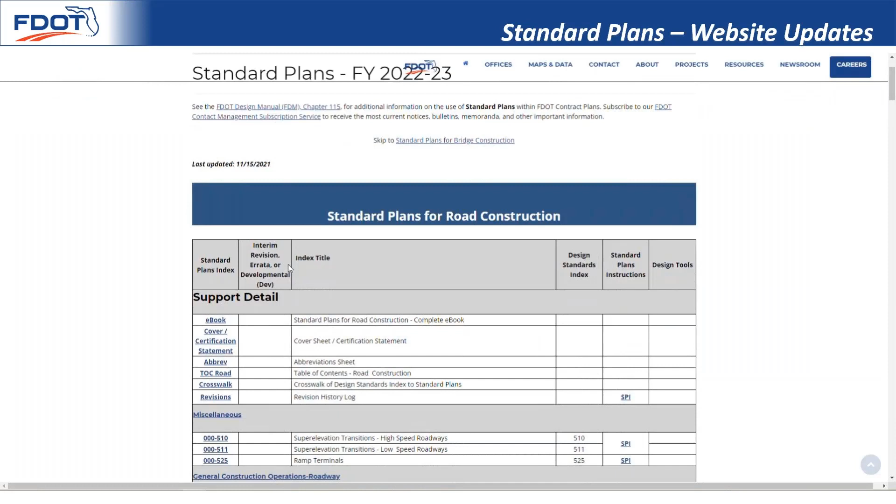Here are the indexes. We have the complete ebook available here. The revision log is always the best place to see a summary of what changed in the indexes on a given cycle. You can see we have the sheet and summary of what changed on each sheet. You can see we had quite a few changes this year, and this is just really a brief summary of what changed on each sheet. You can also find all the past editions of the standard plans here.

The review and response section was the biggest change to our website. We still have the origination form and a link to the industry review, just like last year, and the archive is basically the same as last year. But we now have the track the status of revision page that has all the changes that we've made throughout the year to the standard plans for the current cycle. You can see that there's a link to the original package that was sent out for review.

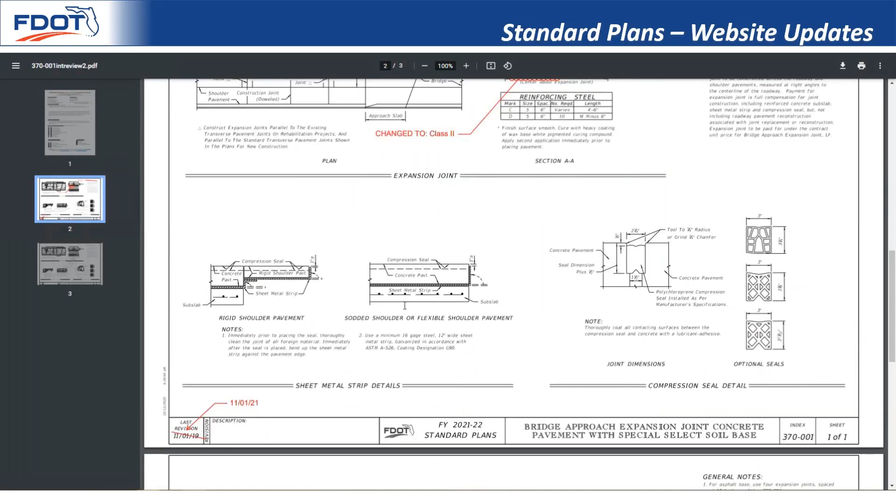I'm gonna select an example here. You can see there's the origination form with the red lines and the draft. We also have the response packages for any indexes we received comments on from our industry review or internal review process. You can see we didn't receive a comment on all of them. Here's an example of what our response package looks like. It's got the comments and the responses.

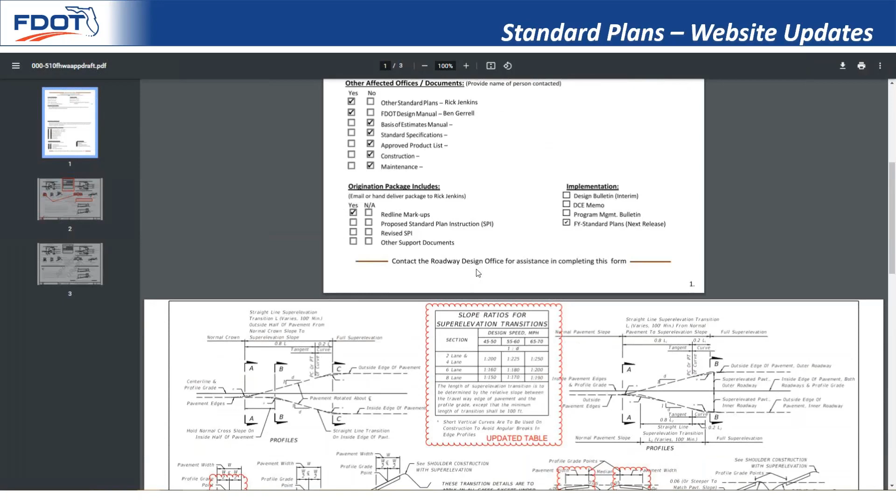And once FHWA has approved the revisions, we post a draft of the approved package with the origination form and red lines, like shown here. Here's the origination form, and then you'll see that we have the red lines. And this draft should be the same as what we released for implementation.

Okay, now that we're done with the overview of the website, let's go over the updates to the 2022-2023 standard plan indexes. We had a lot of revisions this year, but some of them were just administrative changes, so it shouldn't take that long to go through them all.

The first revision I want to go over is more of a global change that was requested by our State Materials Office. Per the request of industry, Class 1 concrete was removed from the specifications and therefore had to be removed from the standard plans. This was done to 18 total indexes. I'm not going to go over each and every location within indexes where Class 1 concrete had to be replaced, but here is a complete list of the affected indexes.

Like I mentioned, I'm not going to cover all the locations, but index 370001 was one of the indexes where Class 1 concrete had to be replaced with Class 2. So you can see we just found where the Class 1 was listed and subbed it out for Class 2.

This index also had a revision to General Note 1. The existing note provided direction to use 4 expansion joints per index 350001, which provides the required joint dimensions. However, it was not clear what the required spacing of these 4 expansion joints should be.

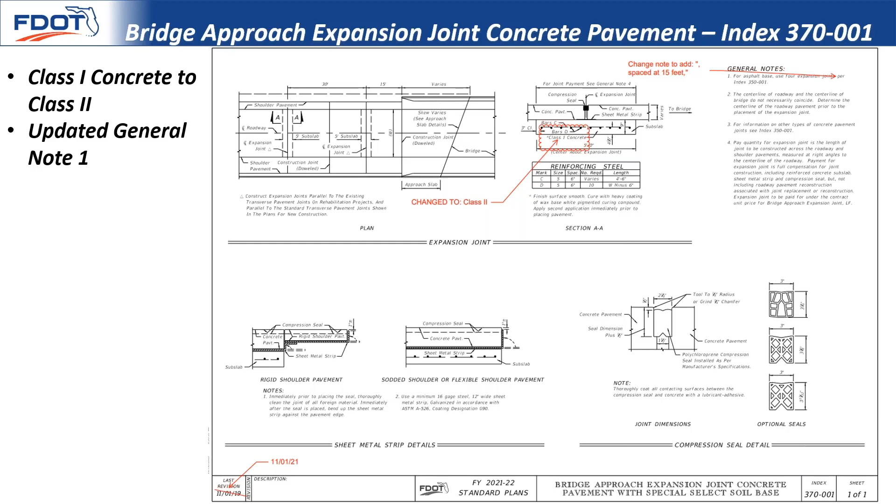Spacing between these joints with asphalt-based concrete pavement should be 15 feet. General Note 1 was revised to indicate the required spacing of the joints. Here's the updated index with the updated General Note 1 and also the Class 1 concrete reference revised.

The next pair of indexes I want to go over are the Superelevation Transition indexes 000510 and 000511. These revisions to the Superelevation Transition indexes were proposed to make the standard plans more consistent with the FDOT Design Manual, FDM, Table 210.9.3. You're going to hear me say this repeatedly today. A lot of the changes we made were to make the standard plans, the FDM, the traffic manual consistent, and that's what leads to a lot of our updates.

Oh, sorry. Here we added the arrows to section A to be consistent with the arrows included in the standard plans index 000511. We updated the slope ratios table to match the FDM. And we added a 2-lane option to the pavement with median details to be consistent with FDM. Here is the updated sheet 1 with the revisions we made.

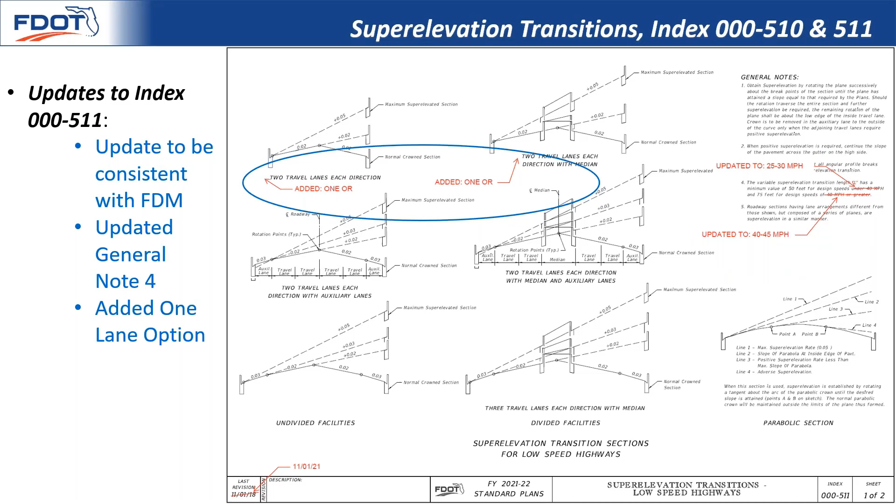Okay, here's index 000511, Superelevation Transitions for low speed highways. Similar to 510, these revisions were made to make the standard plans more consistent with the FDM. Here on sheet 1, we updated note 4 to match the values in the FDM. We added a 1-lane option to the facilities to be consistent with the FDM. And here is updated sheet 1.

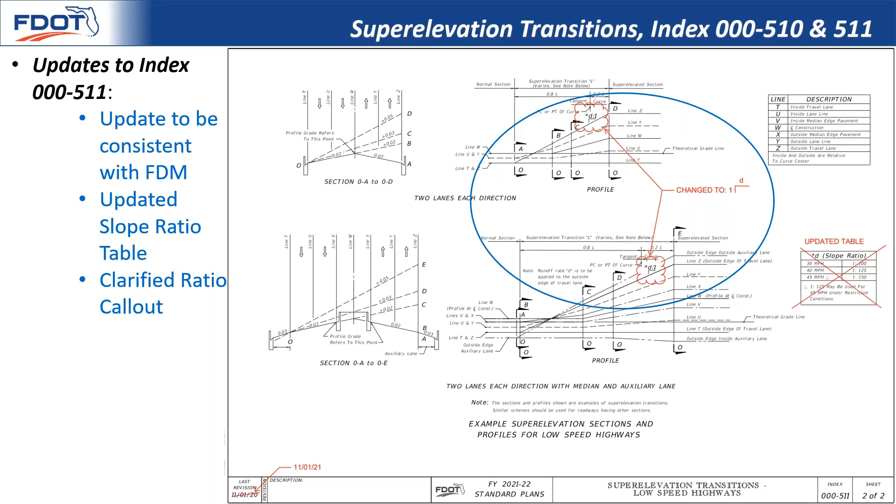Here on sheet 2, you can see we updated the slope ratio table. And we changed the ratio call out in the profile views for clarity. And here is the updated sheet 2.

The next index I want to cover is index 350001, concrete pavement joints. These changes came from our state pavement engineer, Mary Jane Hayden. We made a few revisions for clarity, including updating note 3 to delete the standard load transfer because the correct tie bars are not used for load transfer. We changed the spacing of number 5 bars from 30 inch to 36 inch. This was done to match the spacing of the slabs, which are typically 15 feet long.

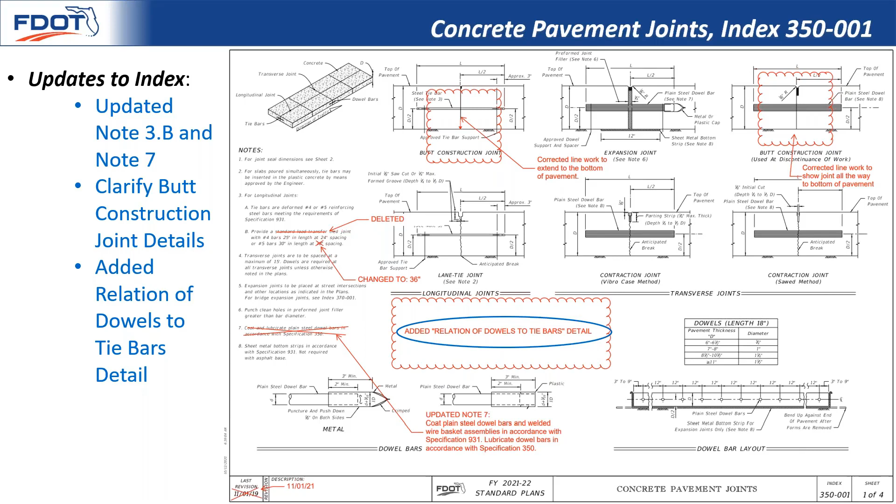We corrected the butt construction joint details to show the joints extending from the top of the slab all the way to the bottom of the slab. But the main update to this page was adding the relation of dowels to tie bars detail. This detail should depict the minimum distance that tie bars should be placed from transverse joints. This was to eliminate the potential of the tie bars overlapping with dowel bars near slab corners. There should be at least 9 inches of clearance between the end of the dowel bars and the tie bars, so place tie bars at least 18 inches from the transverse joints. Here's the updated sheet 1 with all the revisions we just went over.

Okay, here's the drainage index, 425061, the closed flume inlet. I've received a number of calls over this over the last couple of years. The flume length must be called in the plans. The call out previously said varies, but didn't give good direction on how this was to be called in the plans. This information has been added to the SPI to make it clear how the designer should specify this in the plans.

We added the flume length to the generic varies call out to make it clear what we actually wanted to be specified. Also, the varies callouts were deleted from the section reference and note because the sections as shown are not variable. Here's the updated sheet 2. You can see we updated the callout here.

Okay, here's the next drainage index that I want to talk about. We moved the joining mainline pipe to stub pipe details and notes 3 and 4 to the standard plans instructions. And we deleted notes 5 and 7 because they were left over from the old pipe riser detail that was removed. These changes were brought about because the drainage manual requires pipe junctions to have topside access via a structure. Deviation from using a structure to join pipes requires district drainage engineer approval.

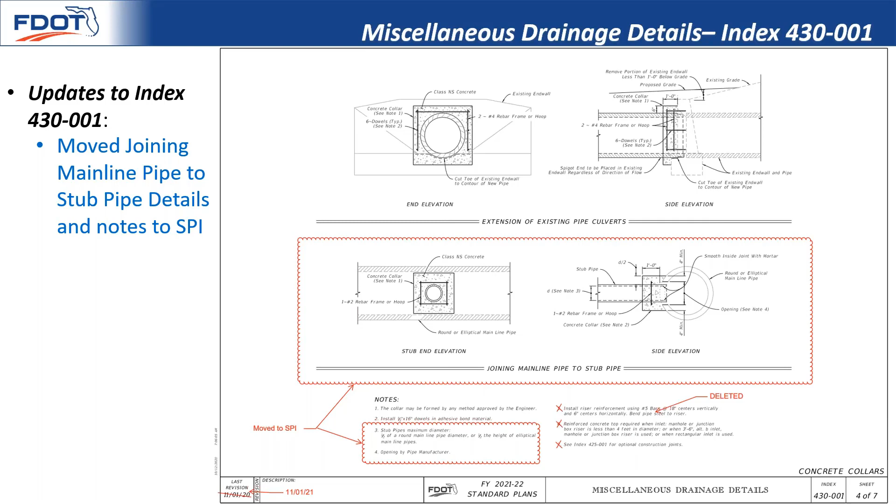While there are applications where the stub mainline pipe may be needed, the detail is proposed to be removed from the index to emphasize that it's a non-standard item. Here's the SPI with the information added. You can see that we added the notes and the details. And here's the updated sheet 4 with the detail removed and the notes deleted.

Okay, like we've done in the past few years, we did go through and clean up and redevelop a few indexes this cycle. The 3 indexes that I redeveloped were Index 520001, Curb and Gutter, 520005, Concrete Shoulder Gutter Spillway, and 520010, the Median Opening Flume. I'm not going to go over each index since it was the same concept with all 3, but I will go over the changes to the 520001 so you can see the concept.

We moved all general notes to sheet 1 and created isometric views to stay consistent with the other indexes. And we did this to all 3 indexes. You can see we grabbed the general note from here and moved it to sheet 1. We also went through the callouts to determine if some were better represented as notes. We did this throughout any index I worked on. We did this to determine if notes should become callouts or callouts should become notes to make things more clear.

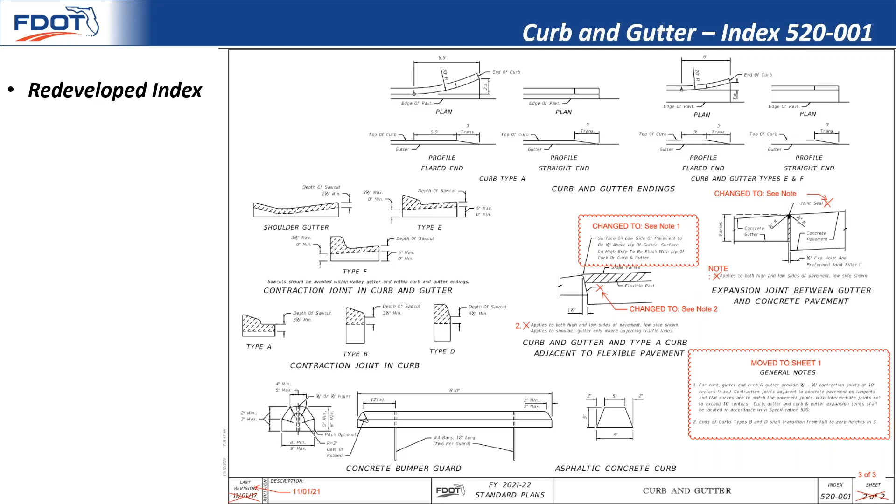We added the new sheet 1 with the isometric views of all the pieces. It looks a lot cleaner with the general notes and the table of contents here on sheet 1. Sheet 2, formerly sheet 1, with the same information as before, just redrawn and cleaned up. And here's the new sheet 3, formerly sheet 2, pretty much the same information with general notes removed and redrawn and cleaned up.

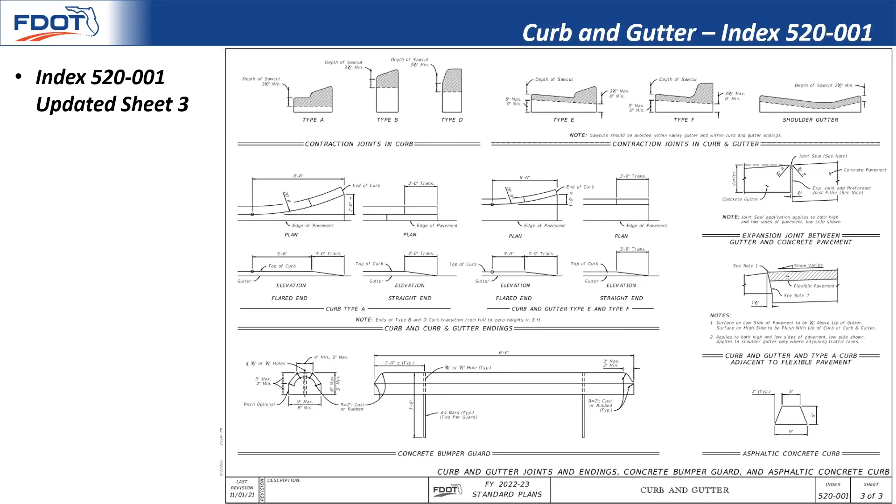We had several updates to the Detectable Warnings and Sidewalk Curb Ramps Index 522002. There had been some confusion on the minimum curb ramp width and how it should align. So we added a new note 2C to help clarify that the minimum width is just a minimum and that the width should match the adjoining sidewalk or shared use path.

So the CR-D curb ramp is essentially half of the CR-C curb ramp. The CR-C curb ramp currently shows the 4-foot minimum dimension at the back of sidewalk to provide a large enough level landing footprint for a wheelchair. The CR-D curb ramp, as it's currently shown in the index, does not provide the best configuration for users of mobility devices. So we updated the CR-D ramp to have a 4-foot minimum dimension at the back of sidewalk for the level landing at the bottom of the curb ramp. This provides the necessary plan area footprint for level landing to allow for wheelchair movement and change of direction. Ideally, the resulting curb return would remain parallel to and aligned with the direction of the crossing.

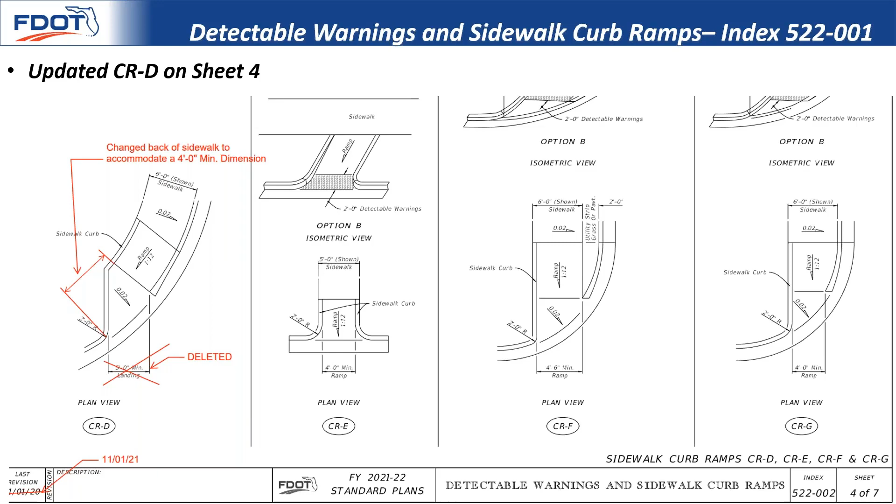So here's the updated sheet 1 with the note added. And here's the updated sheet 4 with the CR-D curb ramp updated. You can see the 4-foot minimum and how it's aligned with the double crosswalk.

Okay, here's some changes that come from our traffic engineering office. First, we revised General Note 2 for clarity here on Index 630001. It now reads, when sidewalk is damaged by conduit installation, replace the entire sidewalk slab. And we wanted to make it clear that the slab had to be replaced in whole if damaged.

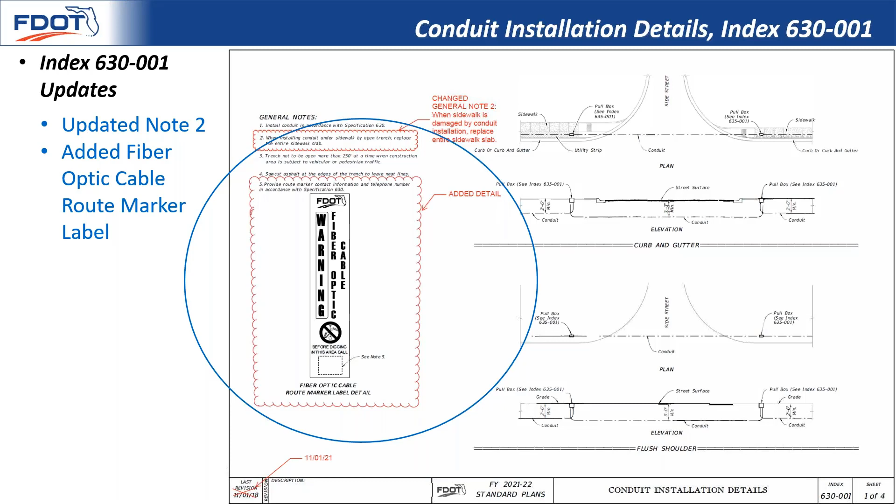The main update to this index was adding the fiber optic cable route marker label detail. There's a repetition of this detail in each plan set with new fiber installation. A standard index detail may eliminate the inclusion of this detail drawing in each project plan set. So here's the updated index. You can see how we added this detail and updated the notes.

So next I want to go over the CCTV pole indexes. First, we will look at the concrete CCTV pole index. The handhole on the pole should be located downstream of the traffic, so all details and notes were updated to show this. These updates were made to both of the CCTV pole indexes, the concrete and steel, 641-020 and 649-020, including adding some new notes on the pole installation.

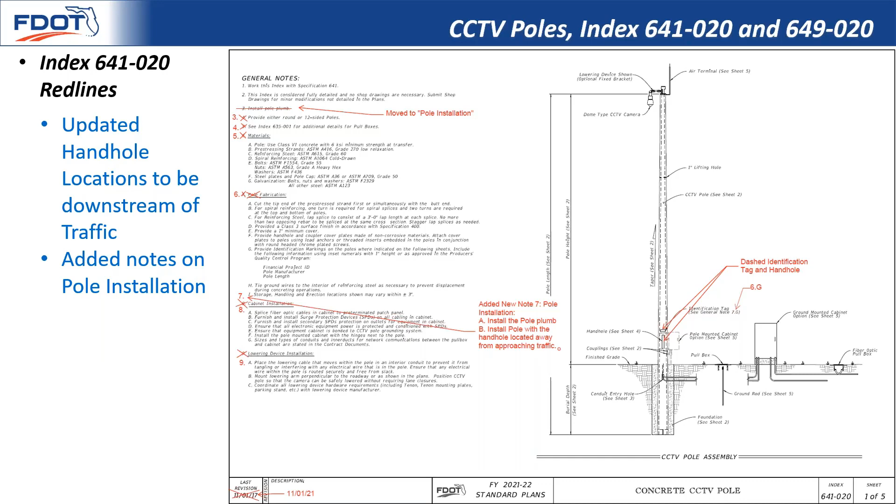Updating these indexes fixes a couple of issues. First off, the handhole location now matches the APL information we provide. Also, the location of the coupling shown on the CCTV pole assembly on sheets 1 and 2 did not match the location of the couplings shown on the pole elevation and handhole detail on sheets 3 and 4. I'm not going to go over each and every sheet in this index, as all these revisions were related to the handhole locations.

But here is the updated sheet 1, and you can see here in the next view, I'll zoom in. You can see that we actually changed the way that the handhole was represented on the detail, and that just clarifies the location.

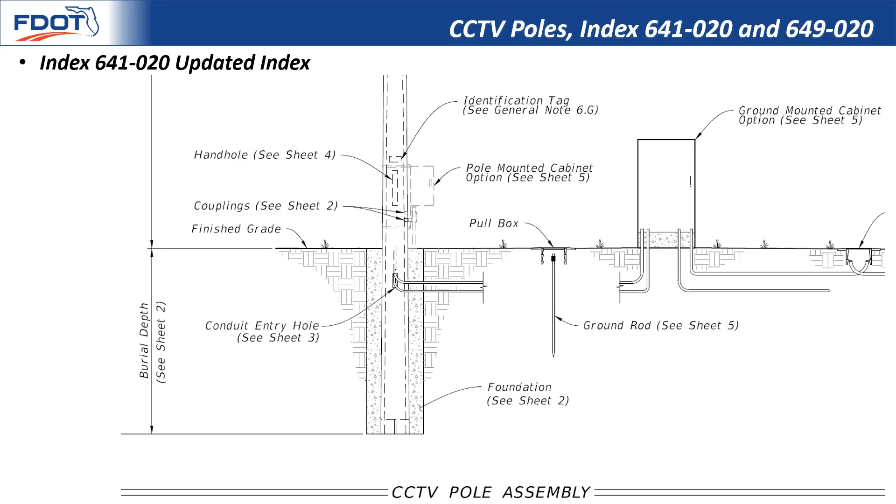We made very similar revisions to 649-020, the steel CCTV poles. We updated the locations and added the handhole locations and added the notes to match the notes that are in the concrete CCTV pole index 641-020 that we just went over. Once again, I'm not going to go over each sheet, but here's the updated sheet 1 with the new notes and the updated handhole details.

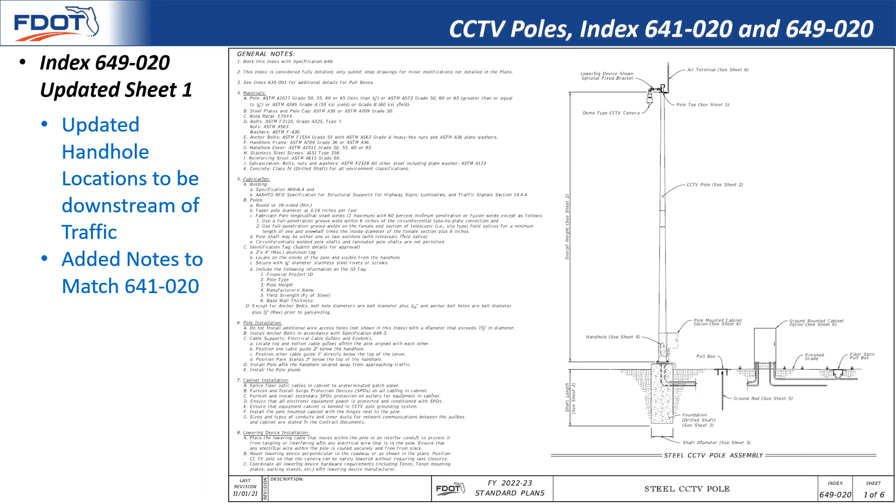So the foundations within Standard Plans Index 646.001, 654.001, 695.001, and 700.120 are being updated to be more consistent between the different applications. An analysis was completed by our Structures Design Office to determine if the foundations could be revised to provide a more consistent design between the various applications. The aluminum post or pole references were also updated throughout the indexes.

So let's start with index 646.001. We changed note 4 to remove concrete type since it's specified in specification 646. We added note 5 stating, as an alternative to the direct buried post-mounted pedestrian detector assembly shown below, the post may be installed on a transformer base included on the APL, use a transformer base included on the APL as an alternative to a post-mounted assembly. I'm going to show you that actual APL item in a second.

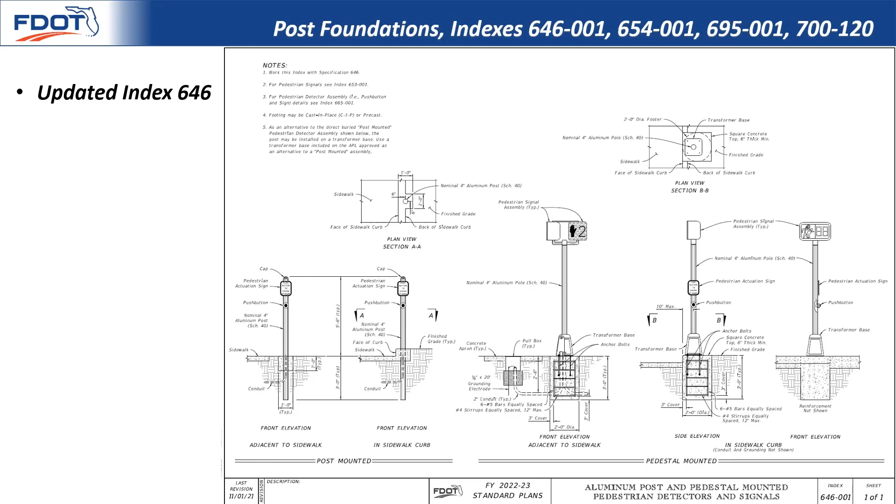Okay, now let's look at 654.001. We made the same type of revisions as 646. We reorganized to show the beacon assembly adjacent to the sidewalk. We deleted detail B and updated note 1 to reference index 700-120 for pull box, conduit, wiring, and grounding installation requirements. We also updated note 7.

We updated the pole callouts and updated the way the anchor bolts were shown in the foundations and updated the callouts to point to both front view and side view details for clarity. I'll show you what it looks like in a second. So here's the updated sheet 1. You can see how we have the callouts now in between the two, and we did this throughout these indexes to make it clear that it's just a different view you're looking at, the front view and the side view.

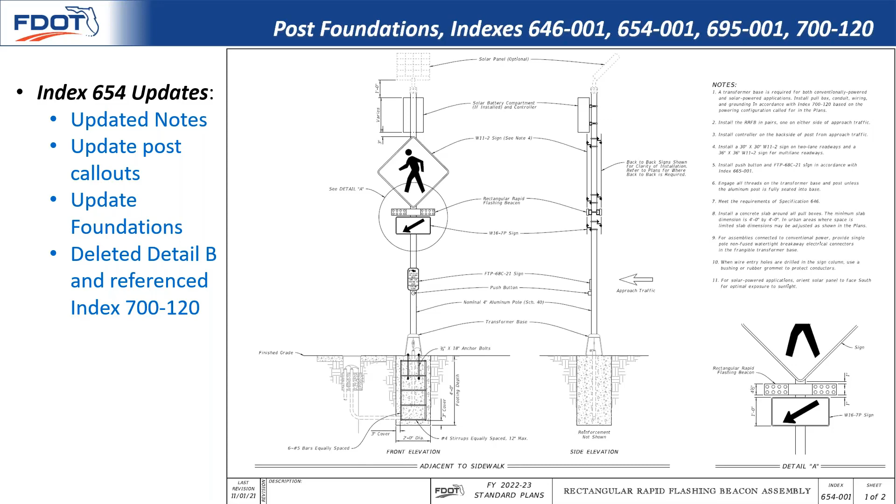Sheet 2 is a new sheet showing the beacon assembly in the sidewalk curb. There. This addition of the inside curb option allows the reach range to work like it does on 646.001.

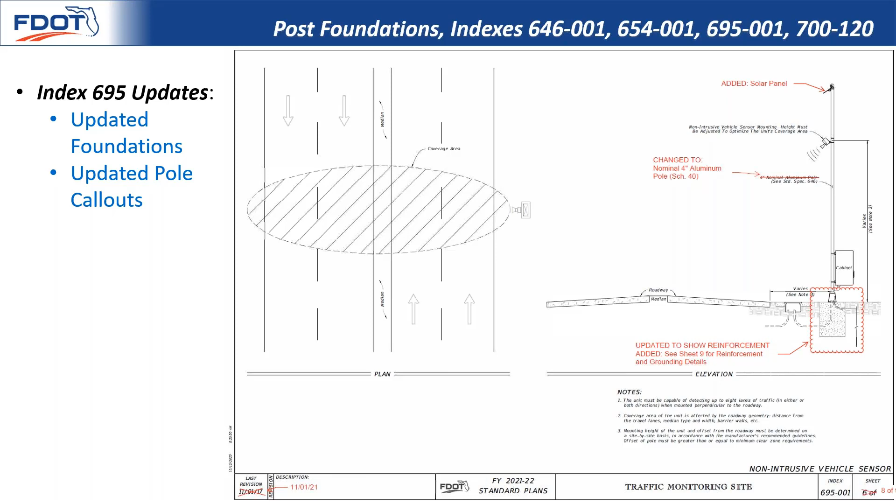We also made similar updates to the foundation details and callouts in index 695.001, traffic monitoring sites. Here's the red lines for the new sheet 8. See, it's very similar red lines and proposed changes. Here's the updated sheet 8 with the foundations and callouts revised.

Here's the new sheet 9. We made the same type of foundation updates to make the indexes consistent. We updated the pole callouts. We revised note 2 to reference specification 646, and we did this on all the indexes. Per the request of our structures office, we did make some edits to note 6 regarding the concrete base dimensions. And here's the new updated sheet 9 with the foundation updates, the pole callout updates, and the revised notes.

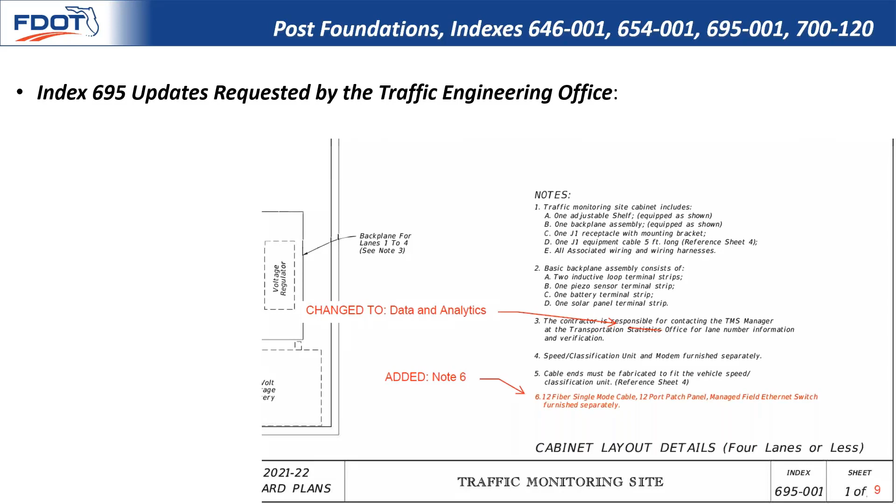In addition to the foundation updates, our traffic engineering office made some other changes to index 695. On sheets 1, 2, 3, and 4, we updated the name of the office from Transportation Statistics to Transportation Data and Analytics. I'm not going to show you all of these, but here's sheet 1 showing this update.

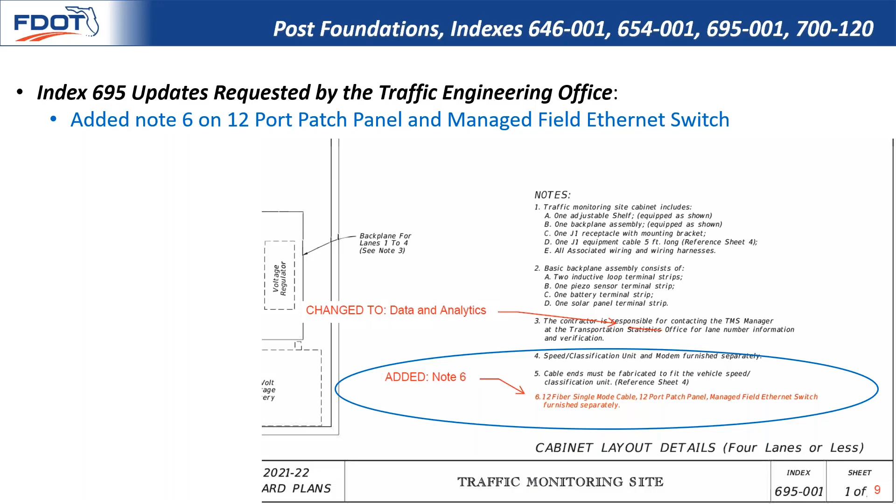They added note 6, 12-port patch panel and managed field Ethernet switch. This was also done to multiple sheets, but I wanted to show you what it looked like here. Also added callouts here to reference the new note 6. Here's the new callouts. And here's the updated sheet 1 with the callouts and then the notes updated.

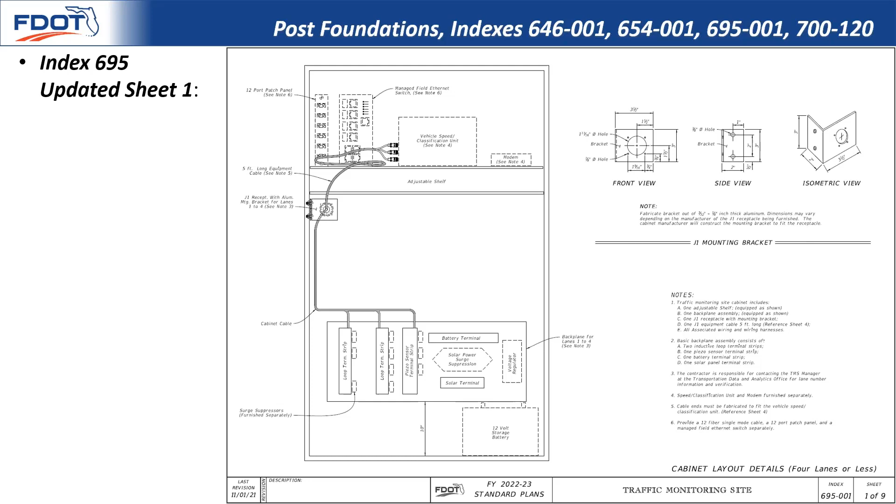So here on sheet 4, we updated the color scheme to match the color scheme that's used by the vendors. So here's the updated sheet 4 with the color scheme updated.

So the interstate traffic monitoring sites are being connected to the FDOT statewide fiber optic network. The weigh-in motion sensors are being installed in 2 different ASTM configurations, Type 1 and Type 3. The weight sensor language was added to specs 695 and 995 according to all volume classification and weigh-in motion traffic monitoring stations. All of these revisions are necessary based on current updates to specification language and industry standards.

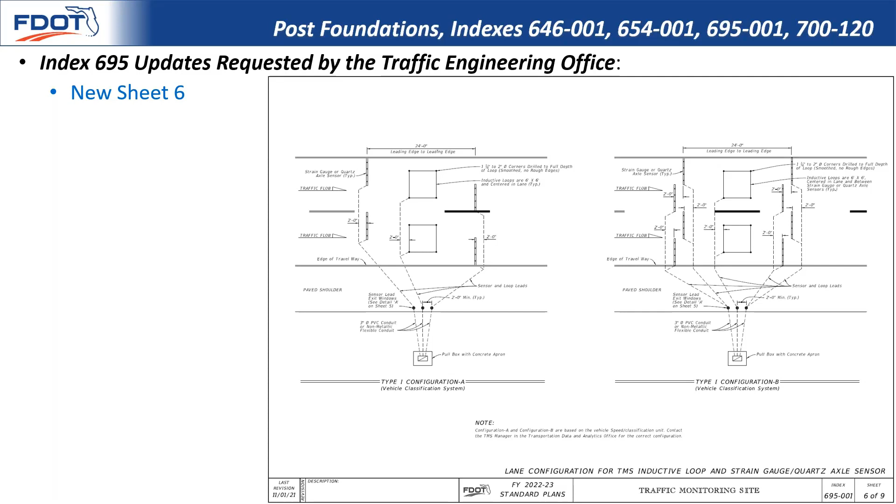So here's a new sheet 6 describing the telemetered traffic monitoring sites, TTMS, for Type 1 lane configurations, A and B. They also added a note to contact the Transportation Data and Analytics Office for the correct layout based on vehicle classification unit. And here's the new sheet 7 describing the TTMS for Type 3 lane configuration.

Okay, now let's look at 700-120. We made similar updates to the foundation and pole details and the notes here in 700-120 as we did in the 646, 654, and 695. We revised the callouts and foundation to make it as consistent between the 4 indexes as possible. We did this throughout the index.

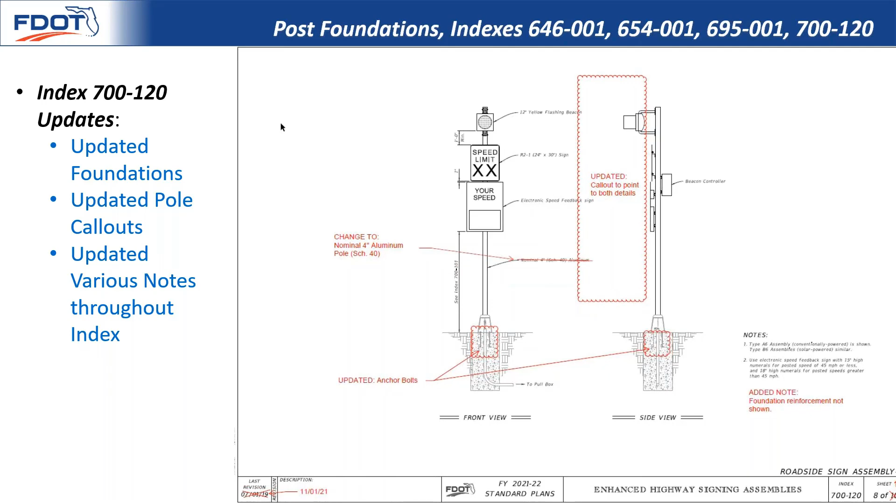Here you can see a quick run through of the red line changes, pretty much the same markups on each sheet on the foundation updates, the added note, and the pole callouts. So I'm just going to quickly run through those. And here's the updated index. You can see the revised callouts on the pole and the foundation, and the note on each sheet is very consistent with what the changes were. So I'll just quickly scroll through all of these changes.

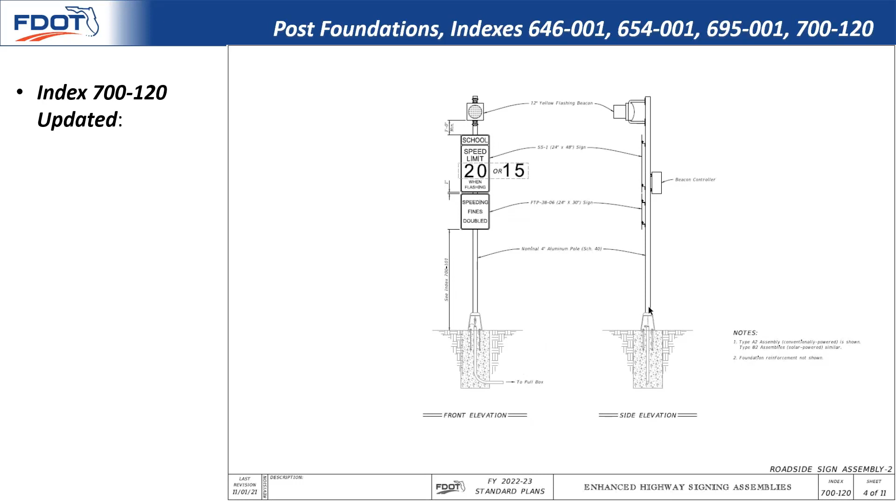The next index I want to go over is index 700-101, and specifically an update to the single column sign case 8, offset from a median, curb, or island nose. This request actually came from our District 4 office. They had been trying to implement a standardized 6-foot offset in this application as a District 4 practice, so we're adding it to the standard plans index to make it a statewide policy.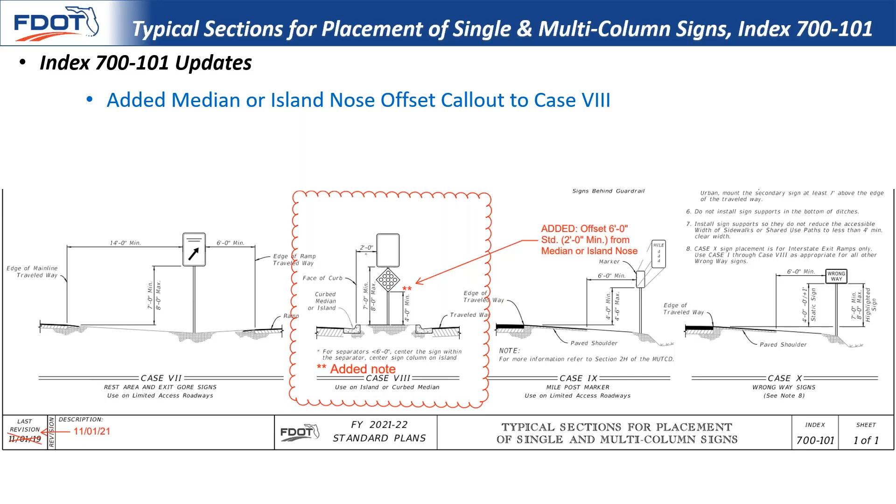Here you can see case 8 detail has been updated with a double asterisk and note to require that the offset be 6-foot standard, 2-foot minimum from the median or island nose.

Okay, next I'm going to go over some of our updates to the special sign details index 700-102. On sheet 5, we updated the speeding fines doubled sign, FTP 38-06, the font, the dimensions, and the numbering. This was updated to follow the current MUTCD standards and correct the FTP graphic.

I did want to point out that anytime we make a revision to a sign or we add a new sign, we have to update the numbers because the last 2 digits are the year that it was released. So for all the updates we made this time, we'll have 22 as the end of the sign numbers. So here is the updated speeding fine sign. And you can see the dimensions updated, including the new number.

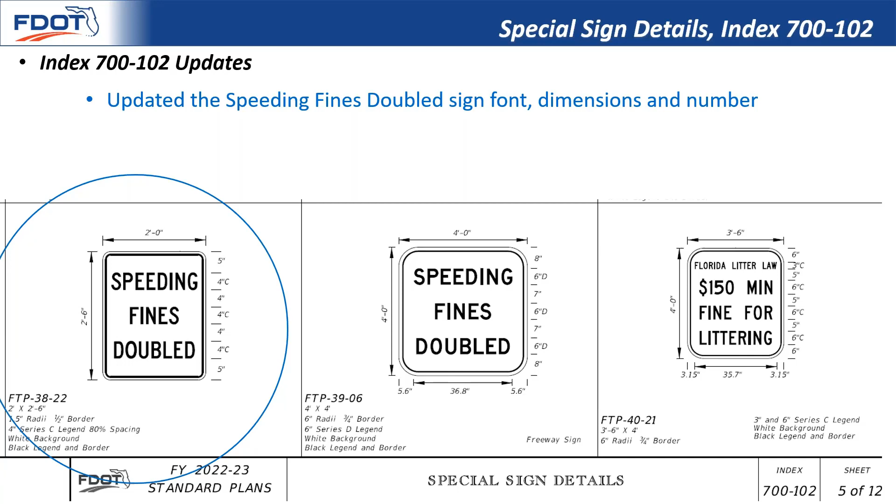Okay, here on sheet 10, we added FTP 90-22 and FTP 91-22, the 2 new school bus load or unload signs. We also updated MOT 106, MOT 406, MOT 506, MOT 606, MOT 706, MOT 806, and MOT 906, all for font size, dimensions, and numbering. We then had to shift to accommodate the new signs. So MOT 806 and MOT 906 are now on sheet 11.

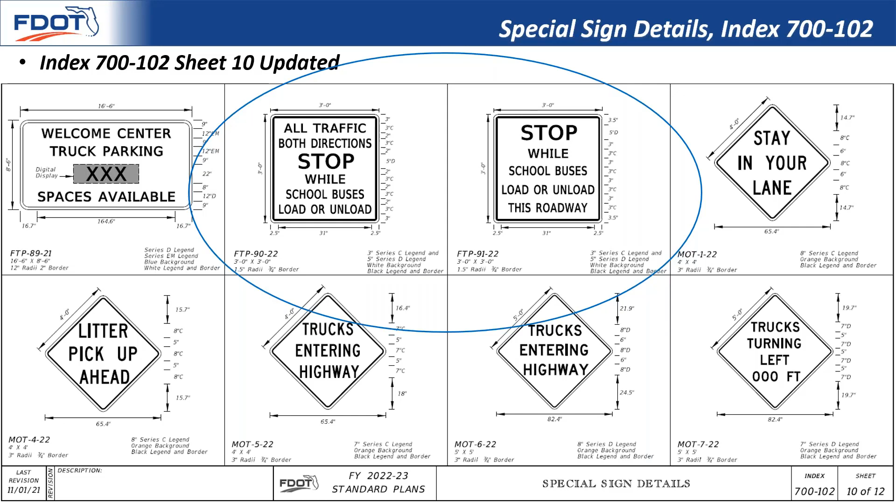We did delete one index from the standard plans altogether. Index 700-109 is no longer needed since this information was moved to FDM Chapter 230 with bulletin 21-07 on wrong way driving. Please see bulletin 21-07 for more information on this.

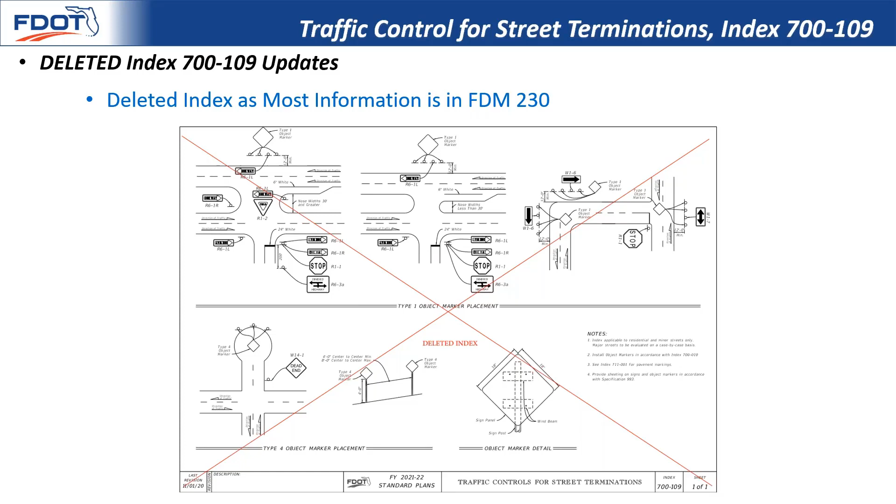The next index I want to cover is index 706-001. For clarity, we updated index 706-001 in regards to where yellow paint should be used and where to place RPMs. We changed all references to yellow reflective paint to durable paint yellow. We also added 2 new notes.

We wanted to make it clear that bituminous is not allowed for the installation of RPMs on concrete. So we added note 3, use epoxy adhesive to install RPMs to concrete median nose curbs. RPMs should not be placed on painted surfaces, so we added note 4, install RPMs on clean, unpainted concrete surface. Do not paint curb surface where RPMs will be placed.

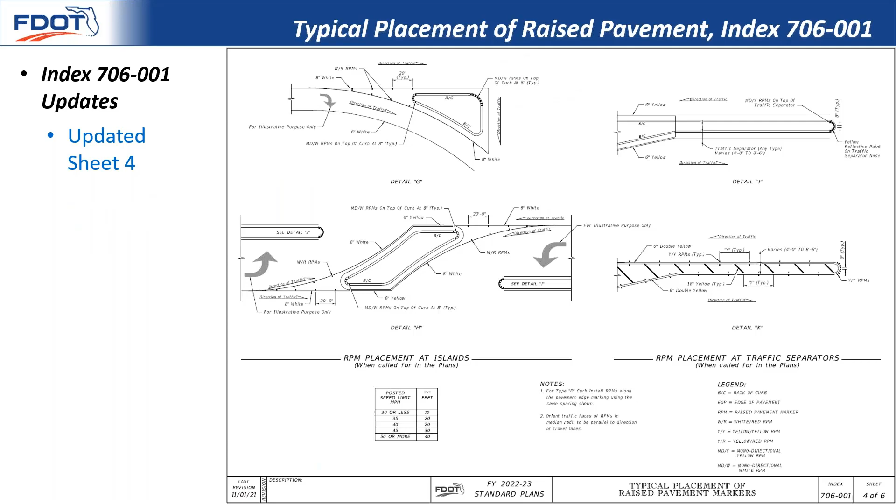We also deleted note 1 for pavement messages, changed note 5, new note 4, to all pavement messages must be white except route shields. Oh shoot, sorry, didn't mean to change it. So where are we on note 4 here? Yes, so note 4 now reads, all pavement messages must be white except for route shields and in-pavement warning markings, so the new pavement warning markings.

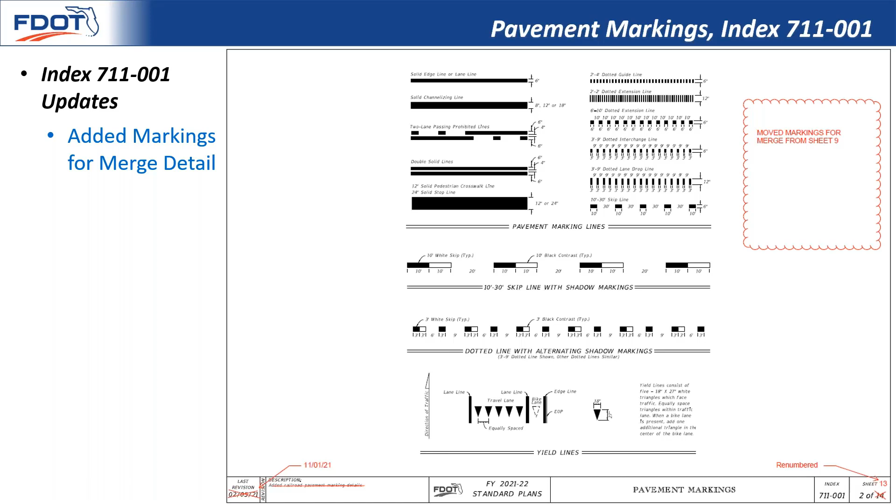So here on sheet 2, we moved the markings for merge detail from the deleted sheet 9. I'll show you where it was previously located in a second. Here's the updated sheet 2. We deleted the right turn lane drop island details and detail C from the index. This information was moved to the FDM and combined with the signing details shown in chapter 230.

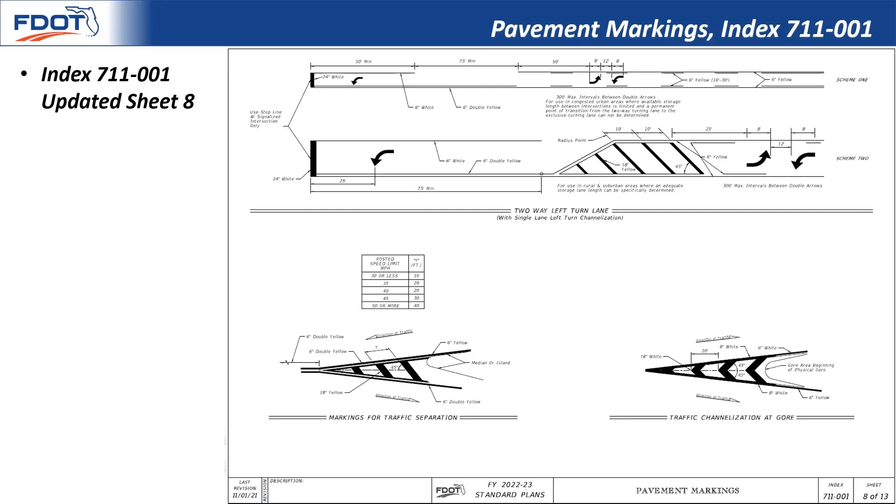Okay, here's sheet 9. Like I said, it was deleted from the index and all the information was either moved to another sheet or somewhere in the FDM. The schemes for transition details and detail D were deleted from the index and moved to the FDM. They were combined with the signing details shown in Exhibit 230-05. We changed detail E to markings for merge and deleted the note, and then moved the details to sheet 2 like I showed you earlier. And we moved the markings for traffic separation to sheet 8.

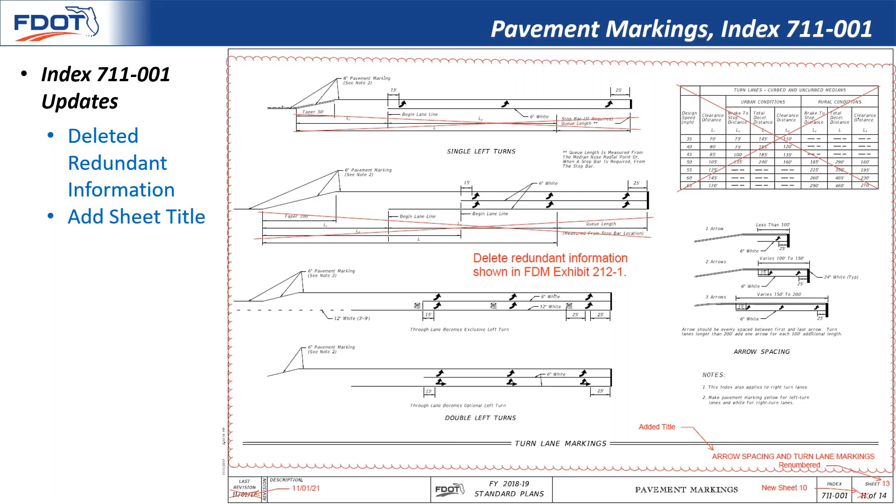Okay, for the turn lane marking sheet, we reverted back to the 2018-2019 index and deleted the redundant information that is already shown in FDM Exhibit 212-1. We also added the sheet title here. We try to do this on every sheet throughout the standard plans to stay consistent. Okay, here is the new sheet 10 that replaces sheet 11 with all the updates.

On sheet 12, or the new sheet 11, we deleted note 4 and renumbered the notes. Note 4 calls for tinting the blue pavement markings to match color 15180 of the Federal Standard 595A. This color information is already covered in the standard specification section 971-1.6, so it doesn't need to be addressed here in the index at all. So we just deleted note 4 and eliminated the incorrect reference. Here's the updated sheet with note 4 deleted and references updated.

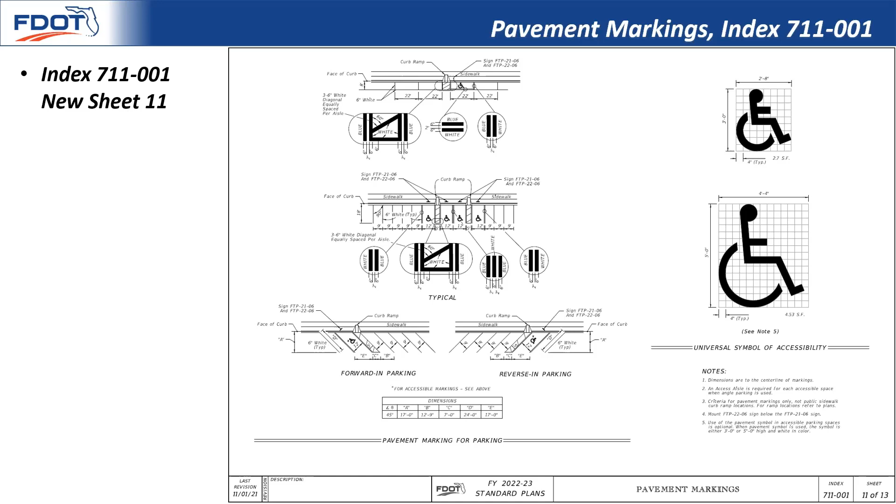Okay, so we did make some changes here to the 711-003, the Interchange Markings Index, again this year. A lot of the changes were similar to the ones we made last year as well. We added some new chevrons and updated pavement markings and callouts. Last year, we added the chevrons to all the exit ramps, but this year we're adding the chevrons to the entrance ramps, and now both entrance and exit ramps have chevron markings for consistency. So here you can see where we added the chevrons.

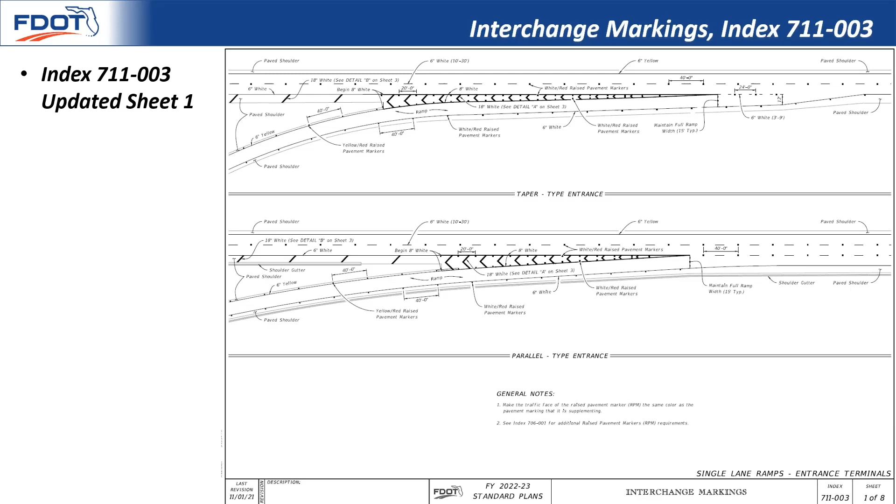So we added and updated the chevrons here on sheet 2 as well, but we also added lane line extensions to extend to the tapers. So here's the updated sheet 2, and you can see what I was talking about with the lane line extensions extending to the taper. This was done to try to stay in line with the updates that are coming to the MUTCD.

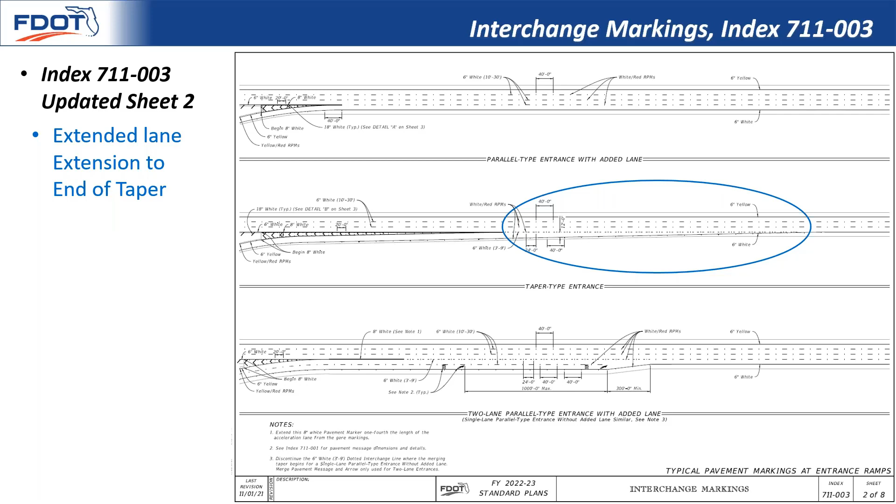So we added the chevrons here on sheet 5 as well. We did delete detail C from the index as it was moved to sheet 3 of index 706-001.

Here we moved note 1 to the wrong way arrow call out at the gore to make it clear exactly where the wrong way arrow is supposed to be placed. I mentioned that before when I was talking about cleaning up the indexes. This is the kind of thing that we check to see whether a note better fits as a note or if it better fits as a call out.

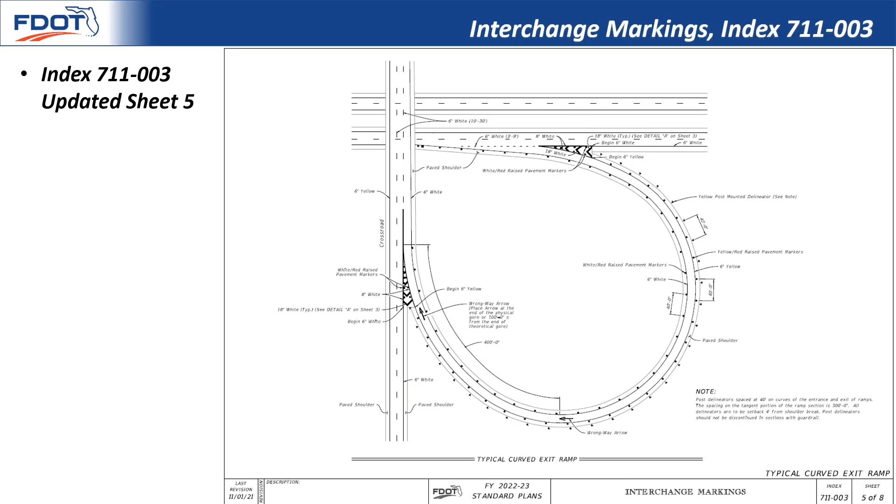And here's the updated sheet 5 now with just one note and then the call out and then the chevrons added. Okay, similar to sheet 5, we moved a note to a call out to make it clear where the wrong way arrow is to be placed. Previously a note, now a call out. Here you can see the note and call outs updated.

Okay, as I mentioned earlier, we did have one new index this year. This new index was developed by Richard Stepp in coordination with the industry fabricators and the Structures Design Office. The purpose of this index was to provide a utility conflict pole option that can avoid overhead utilities and power lines.

There's a horizontal length of 16 feet provided. The vertical rise provided is 15 feet. By comparison, the normal poles in the Standard Plans Index 715-002 have a vertical rise of only 5 feet.

This has been a popular design used in the districts, but now with it being added as a Standard Plans Index, the need for the project-specific pay items, special designs, and central office review and approval is pretty much gone. The index provides a complete design that the users can just reference in their plans.

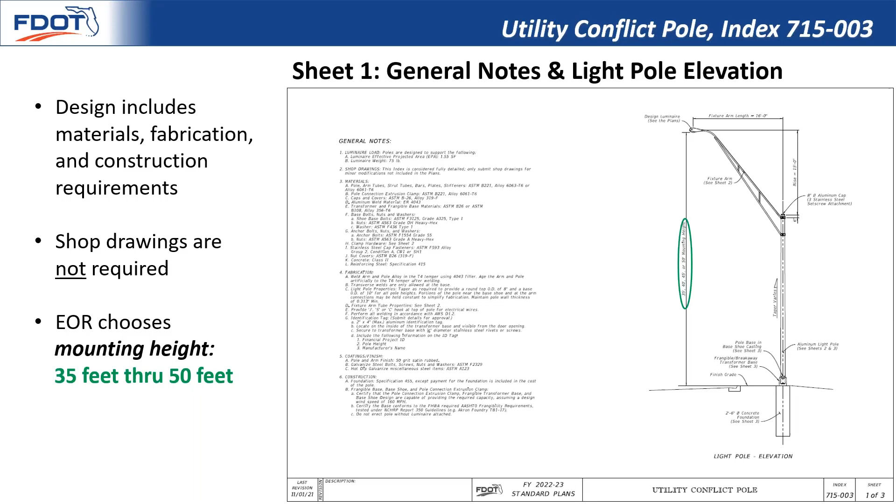Pole clamp and welding requirements are provided here on sheet 2. Here, the fixture arm length is further detailed. The fixture arm length measures from the center line of the pole to the approximate center of the luminaire. All of the dimensions can be checked here as well.

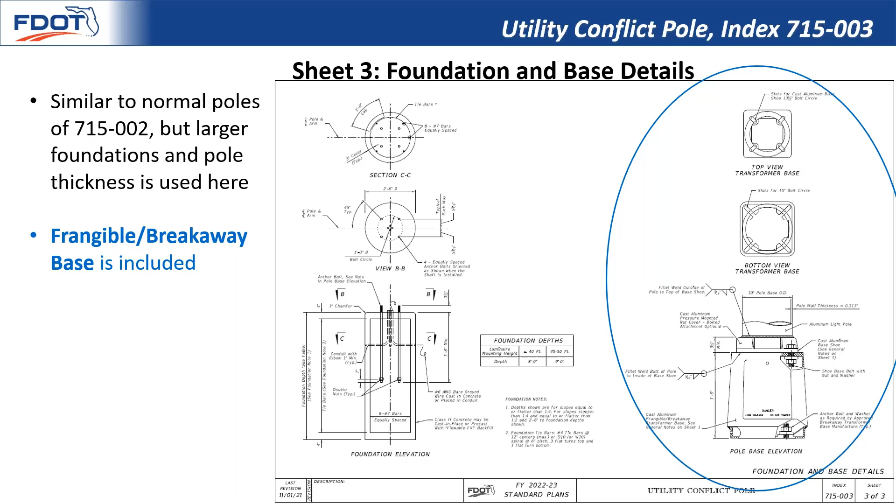Sheet 3 shows the foundation and base details, similar to the poles in 715-002, but only with larger foundations and pole thickness. We do have a frangible or breakaway base included as well. Also shown on sheet 3 is the foundation information. The 2.5 foot diameter concrete foundation is included. The engineer should select the standard foundation pay item option to use the foundation shown in the index. If a different option is needed, a project-specific design will be required.

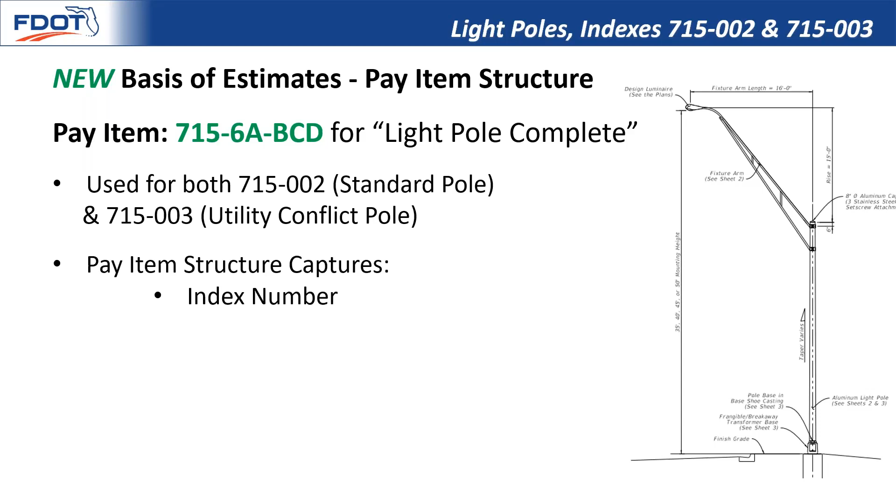Okay, effective July 2022, there will be a new basis of estimates pay item structure for the light poles covered in both indexes, 715-002 standard pole and 715-003 utility conflict pole that we just covered. The new pay item structure includes index number, foundation type, either standard or project specific, mounting height, horizontal arm length, and vertical arm rise.

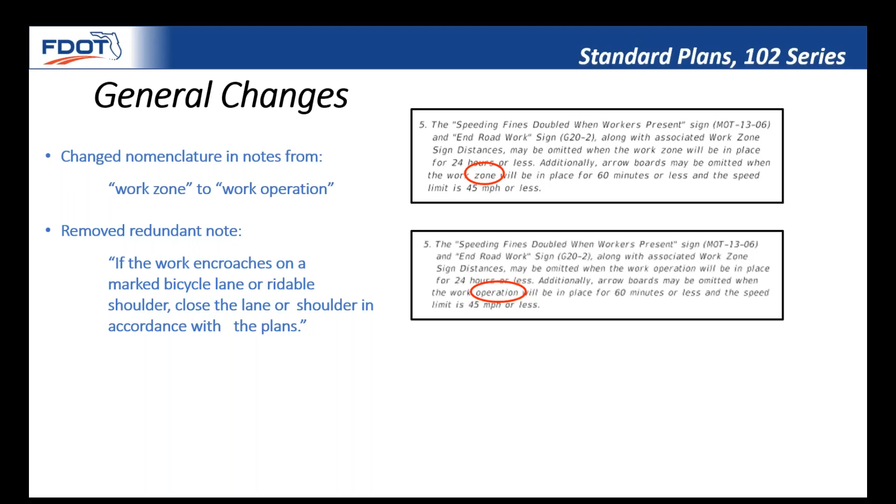And so we wanted to make sure that we clarified that and used proper terminology so people weren't confusing your entire construction limit or your work zone with a specific temporary traffic control work operation. So throughout the notes, we revised work zone to work operation.

You'll also notice that last year there were some changes made to try to better address some standard plan signing options and information relative to any time that you're affecting a marked bicycle lane or what we refer to as a rideable shoulder. And the rideable shoulder was intended to capture the fact that on the state highway system, outside of limited access facilities, any shoulder 4 feet or wider is considered a bicycle facility.

And so we had this note indicating, more so for the EOR, that if you have work that's encroaching in these areas, then you need to close that bicycle lane or shoulder to accommodate the cyclist. And the note appeared on a number of different indexes, but we got a lot of questions about the rideable shoulder part of this.

So we decided to better define exactly what we meant by marked bicycle lane, and in particular the shoulder part of this. And so we revised the language in the 102 specification to say it in one place in the spec instead of having a note that's redundant throughout the standard. So this note was removed off each individual index that had it on there before, and now it's just addressed in one place in specification 102.

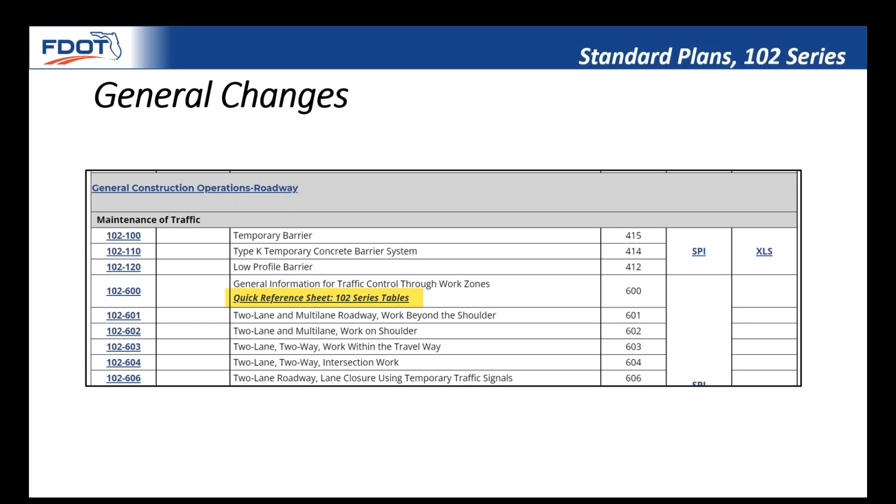So last year we went through and created one set of tables that are posted within 102-600, but then we also created this quick reference sheet so that folks could print it out, maybe laminate it, and have a reference for them in the field, regardless of what standard they're looking at. And so we did add a second sheet to this reference.

So, to actually capture all the tables that are included in 102-600, but then also we wanted to add a 9th table that is only on this quick reference sheet, and it is basically tabulated values of L, which is the taper length, for common widths and speeds.

And that way you're not out there having to do calculations when determining what the appropriate value is for your taper, regardless of whether it's the full value of L or down to 1/3 L if it's a shoulder taper. So again, for common widths and speeds, we now have this table to help assist with those example values.

So just going through some specific changes throughout the indexes themselves. Index 102-600 sheet 5, which had the work zone sign information, so U-channel, sign size, type information. We made a revision to table 7, and basically there were some sign size options that were a holdover from the project information sign that was removed a couple of years ago.

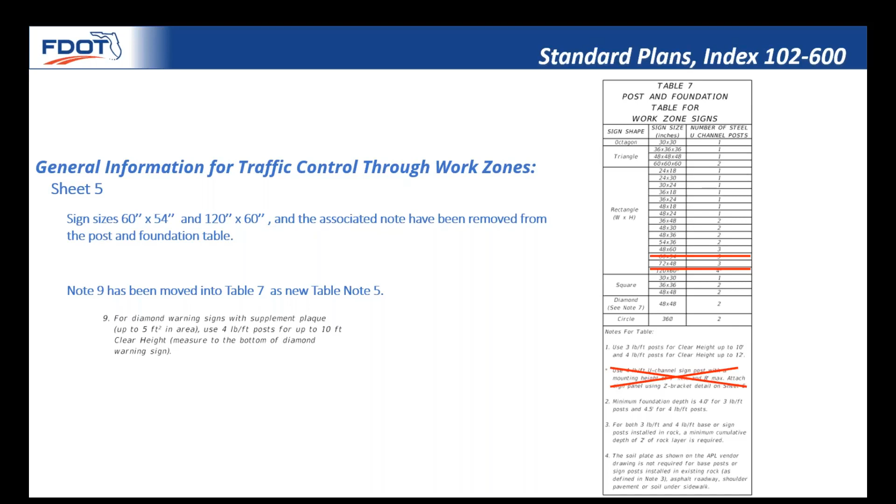And so we cleaned up the table to remove those sign size options, as well as there was note 9 in last year's version of the general notes that addressed the proper weight of posts to use with certain heights of signs. And we felt that it was more appropriate to consolidate that with the notes for the actual table 7, which also provides different requirements for what size posts to use for different mounting heights and sign sizes. So that's it for sheet 5.

On sheet 6, you'll see towards the end of this presentation on the 102 series that we've added a new scenario in the bicycle facility closure index 102-661, and within those there are some additional signs that weren't previously shown either on 102-600 or 700-102, which is the special sign details index.

And so on the left here we have some of the MUTCD standard highway signs that weren't shown on 102-600 that we've added. And then on the right, you're seeing the 2 additional bike merge signs that we needed to add specifically because some of these bicycle options that we've added to the standard plans, while they have been approved by the MUTCD committee, are not actually integrated into the standard highway signs yet.

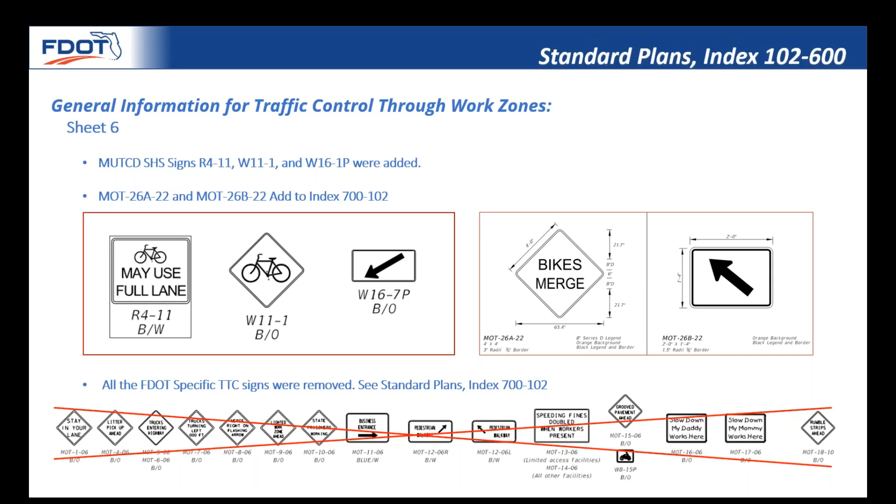On sheet 7, you'll see a little bit of reorganization here, but the main focus is that this side road intersecting the work zone detail, which was last year included specifically on index 102.606, we decided to move it into this general information standard because really you could apply this flagger scheme along multiple different standards.

And so we wanted to make that a little bit better understood and put it in a place where it could apply to any temporary traffic control zone, where you might have a side road intersecting the work area where there's a lane closure, and you're going to have to locate a flagger there to control that side road.

Index 102.602. So we got a few questions on this, and admittedly, because the note 3 that was providing some incidental work provisions for shoulder work was very similar to our mobile operation provisions for not including signs or shadow vehicles, it got confusing to some folks, especially in the maintenance side or folks that are doing like routine inspection type work.

And so where we had originally last year said that for incidental type work, you don't need any channelizing devices basically, but you would still need to put a road work ahead sign up. And the intent was that you would use either 102.602 for static shoulder work, or you would use 102.607 for any sort of mobile work, but it was incidental.

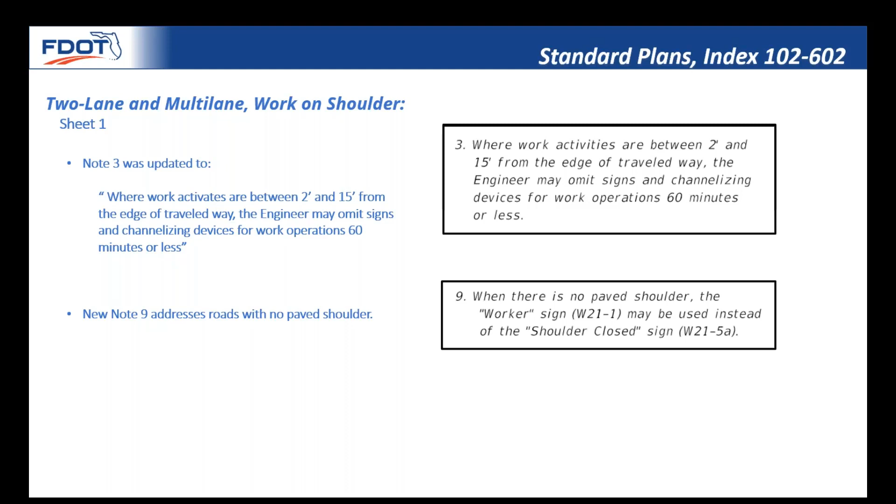Allow them to still use the worker symbol sign, the old W21-1 sign, instead of the shoulder closed sign when there is no paved shoulder. So it'd be a little bit more consistent setup with what y'all are used to with the shoulder work prior to the revisions last year.

Let's see here, standard plan index 102.603, which is the 2-lane, 2-way work within the travelway. This was mainly just a little bit of cleanup to note 8. We kind of revised the detailing on sheet 2 for any time you have either the work area encroaching a railroad area, or if you have to encroach along the center line. And basically, the details on sheet 2 show exactly what B in the original note 8 was describing.

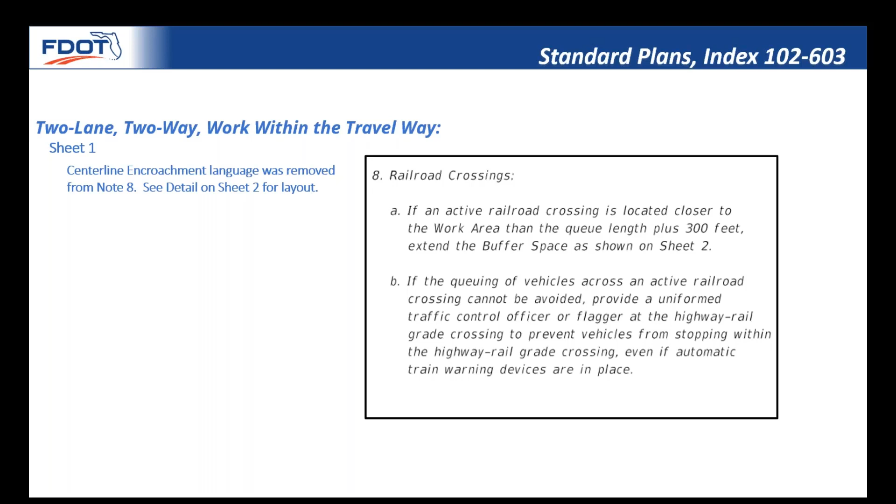And so we decided, to avoid some confusion and questions we were getting, to allow the details on the sheet to stand on their own. So basically the change here was just we're addressing the railroad crossing special provisions that tell you when to use and how to use sheet 2. But in terms of encroachment on the center line, there's a detail there for it. So you don't need us to describe it to you when you have a picture. A picture's worth 1,000 words, as they say.

Index 102.604. So this is the 2-lane, 2-way intersection work. Note 9 was revised because we had originally redeveloped this index last year to account for the fact that there was a little bit of misuse of these intersections, because we were seeing flaggers being used to control multiple entrance points into the work zone or multiple directions, which is technically a violation of the MUTCD flagging procedures.

A flagger should always only be controlling the traffic which he faces, which means he can't face more than one direction. So we had put in a restricted left or right turn movement sign for the intersection work details. But now that we've moved that detail for side roads intersecting the work zone to index 102.600 that I showed you a minute ago, where you add an additional flagger, we've made that an option here. So either you've got to do the restricted left or right turning movement sign, or you can use an additional flagger.

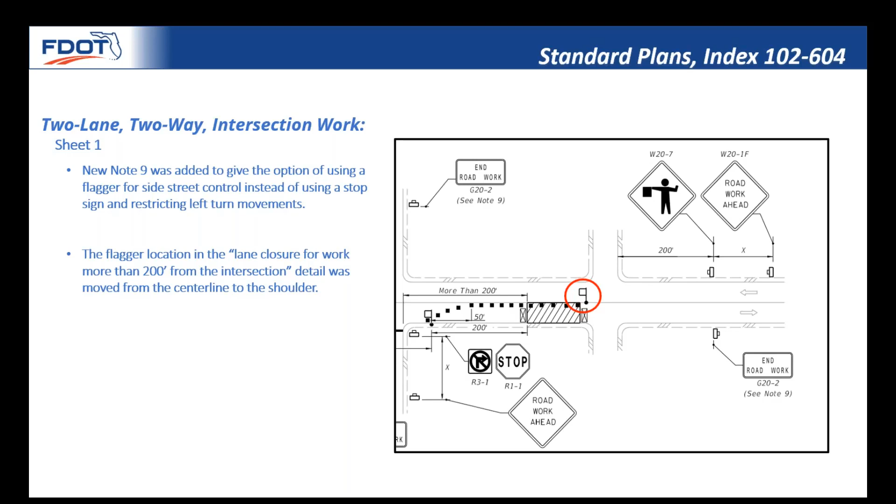Also on the intersection work index 102604, we noticed that the flagger symbol was kind of erroneously shown along the center line. However, that should have been shown on the shoulder. So that update was made.

One last update here too was similar to that, is that the flagger symbol was shown on the offside of the lane of traffic for which the flagger should be controlling. So in this detail, we also updated to make sure the flagger was shown on the correct shoulder.

Let's see here. So mobile operations, index 102607. This one was pretty simple. The standard specifications require all vehicles in the work area to have high intensity rotating, flashing strobe lights on the equipment and vehicles.

And so with the theme last year of trying to remove redundancy, this was just stricken because we want it said one place and one place only, and that is in standard specification 102.

Index 102613, you'll see the note box here in the top right corner of the slide. Essentially, this change was just to make sure that the provisions for when a motorist awareness system is to be used, the 5-day period, multi-lane divided facility, posted speed of 55 miles per hour or greater.

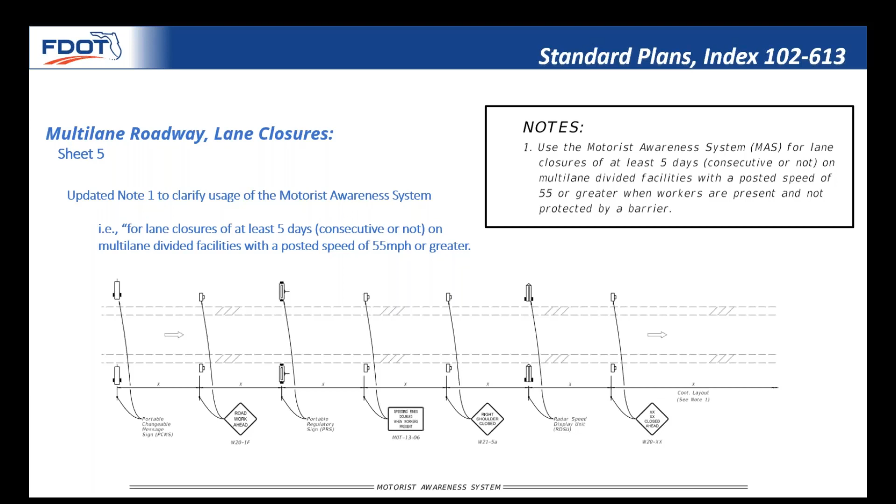We wanted to return that to the standard so that it was clear, not just on design projects, but even on department permit projects and things like that, what the requirements for the use of the MAS system were. And so we've taken that and located it back on the index.

Index 102615, multi-lane roadway intersection work. This was a pretty minor change, but essentially the original layout for this kind of had the shadow vehicle with attenuator within the buffer space. However, to be consistent with the MUTCD, the buffer space needed to fall upstream of the shadow vehicle. So we just updated that detail to show that correctly.

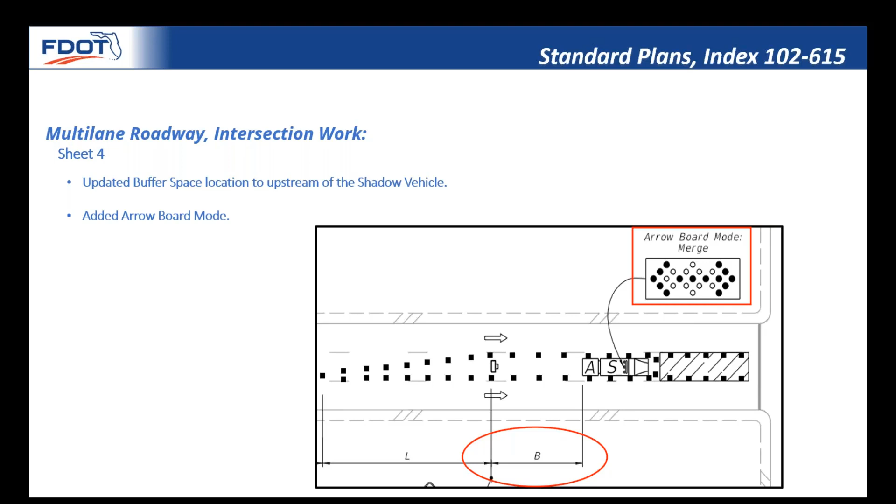And we realized that the mode, or the fact that there should be an arrow board on the shadow vehicle, wasn't shown, so we added that along with the mode. Likewise, on index 102.628, the shadow vehicle was within the buffer space, so we revised the detail to properly show the buffer space upstream of the shadow vehicle.

Also on index 102.628, we noticed that the new scenario that we added last year for a 3-lane section where you would use the 2-way left turn lane as a temporary lane for a lane closure showed a merge arrow when you're approaching that lane closure, but it's actually a shift, not a merge, and because of that, using a merge arrow is not accurate with the requirements in 102.600.

So we changed the merge arrow and the sign to more accurately show a shift and a caution mode on that arrow board and not a merge arrow.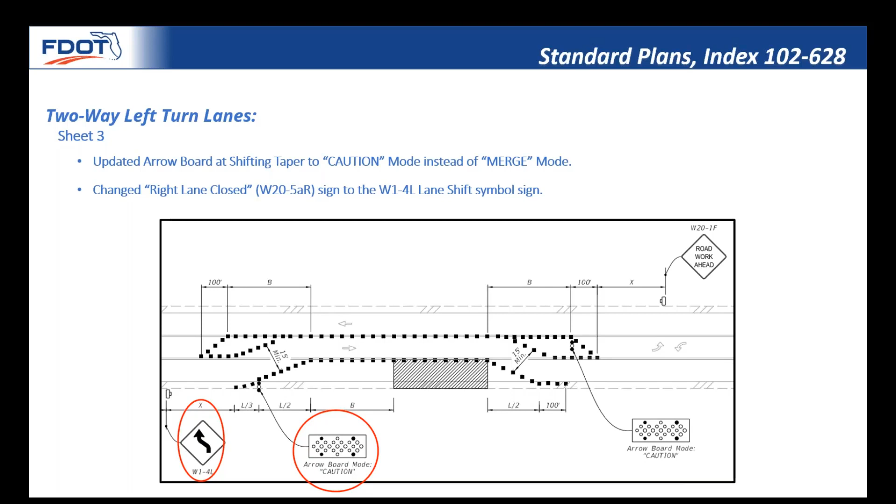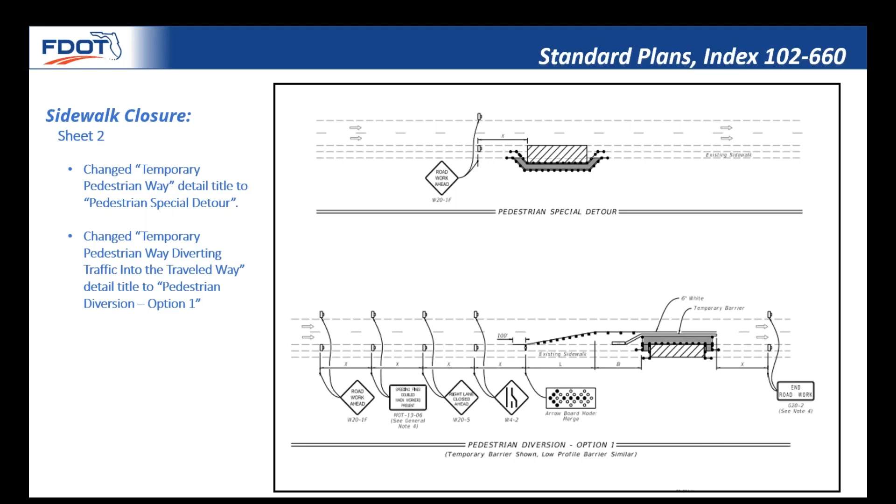So consistent with the pay items, we call that a pedestrian special detour. So we changed the titles to better match what we also call these things in the specifications and pay items.

On sheet 2, we also added a new option 2, because we realized that the preference will always be, anytime you're taking a pedestrian out of their separate facility, i.e. sidewalk or shared use path, whatever it is, and placing them within the traveled way, that we want some sort of positive protection and separation with a temporary barrier.

That's not always possible because you end up with these chopped up intersections in rural or urban environments that don't allow for the full length of need of a barrier system to even be installed. And so in those cases, we realized that we need an additional option for those low speed work zone areas where you have those constraints where you can't provide a temporary barrier.

So basically option 2 is a restricted option for lower speed environments, essentially where you can't get barrier installed. And so the standard plans instructions give designers the additional information on the restrictions for the use of option 2.

And that's why we added a new note 5, giving the engineer and the designer the heads up that option 2 should only be used when called for in the plans or as approved by the engineer. So it's not just an option that the contractor can default to anytime they want.

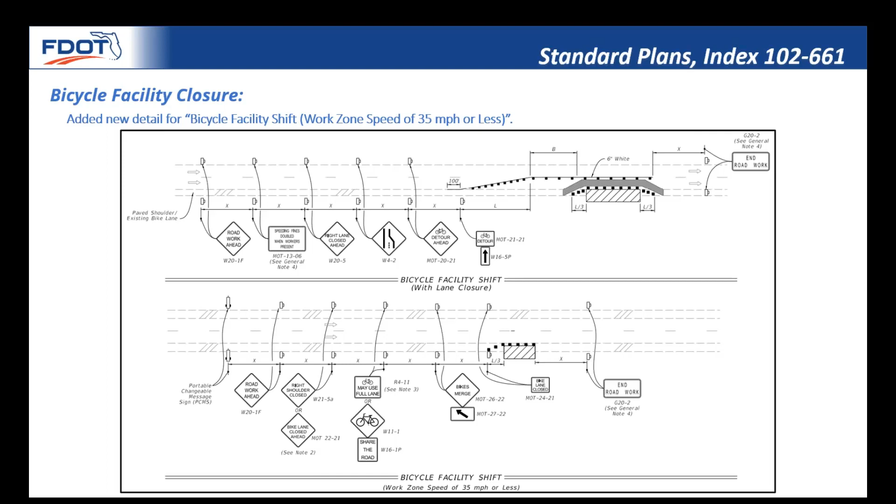We also added an additional scenario to the bicycle facility closure. So, there's options in the FDM under certain conditions to actually merge a cyclist into the lane. So, for example, for a shoulder work where you're actually closing the bicycle lane or a rideable shoulder. And so we added a bicycle facility shift shown on the bottom side of this detail for lower speed work zones. So it's the 35-mile or less work zones where a sharrow would be allowed for a permanent condition. There's a new signing package here that we're providing that will allow for that type of scenario to take place.

And that wraps up my portion of the standard plans updates for temporary traffic control. We're gonna transition over to Josh Turley's presentation for the structural updates. Hello, my name is Joshua Turley. I'm the Structures Standard Plans Engineer here at the State Structures Design Office. I'm going to take you through the notable updates to the Structures Standard Plans for the 22-23 Standards Book.

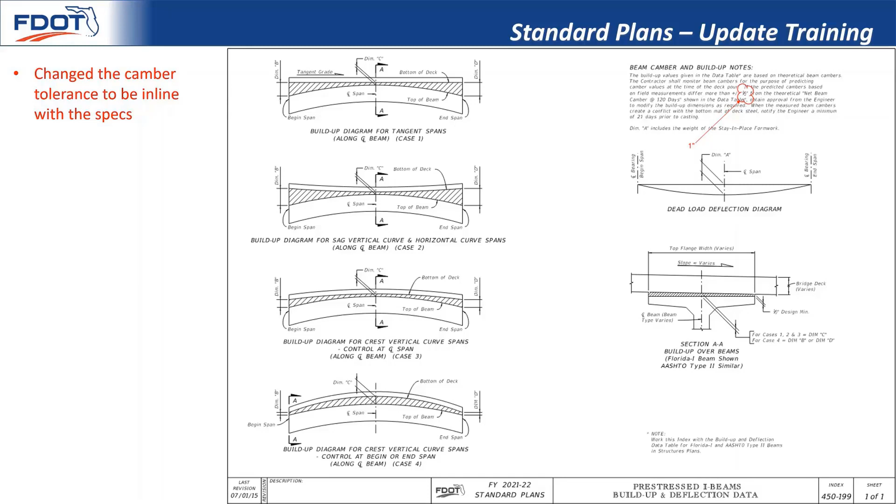First, we're going to take a look at 450-199, Pre-Stressed I-Beams Buildup and Deflection Data. For this detail, we changed the camber tolerance to be in line with the specs. It was 1/2 inch on this standard, but to make it in line with the specs, we made it 1 inch. And here's the final sheet.

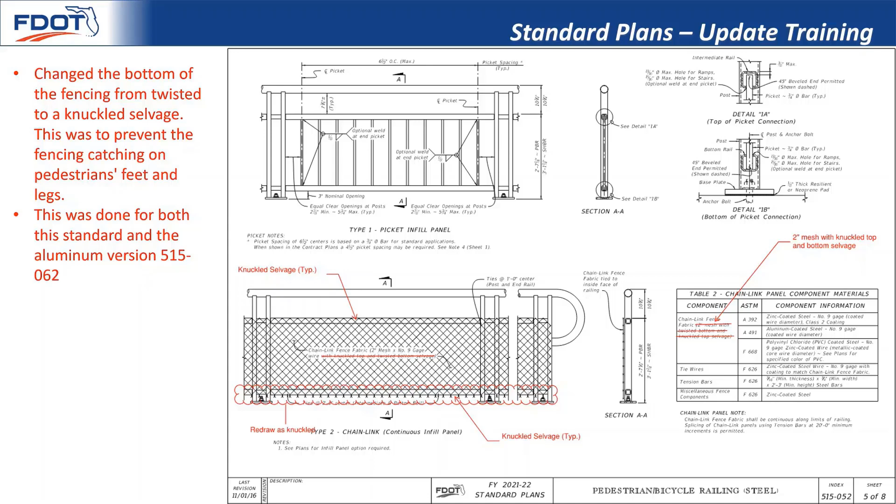Next, we'll take a look at 515-052 and 515-062, the pedestrian bicycle railing. For this standard, we changed the bottom of the fencing from a twisted type to a knuckled selvage. And the reason we did this was to prevent the twisted type from catching on pedestrians' feet and legs. This was done both for the aluminum version and the steel version of this standard. We updated both the graphic and the table. And here's the final sheet.

Next, we made a lot of changes to 521-660, the light pole pedestal for the bridge. So essentially, contractors and industry were asking us for an option that allows for slip forming past the pedestal. Previously, you'd have to stop the slip forming machine, form up around the pedestal, cast the pedestal in the barrier, and then continue on with the slip forming machine for the barrier. So we had to reorganize the standard, move some details around, and update the bill of reinforcing steel.

In this first sheet here, mainly we're just updating the labels for the reinforcing bars to align with the new bill of reinforcing. And here's the final sheet. On the next sheet, again, we're just moving some of the existing details around to make room for what will be a third option. And here's the final sheet showing the third option.

Over on the right, you can see a section of that third option, which allows for the slip forming. We have both a section and a plan view. And so in here, you can see the 1.5 inch gap between the pedestal and the barrier. The slab steel extends out into the pedestal. You could slip form right past the pedestal, and then when everything's done, you grout the gap.

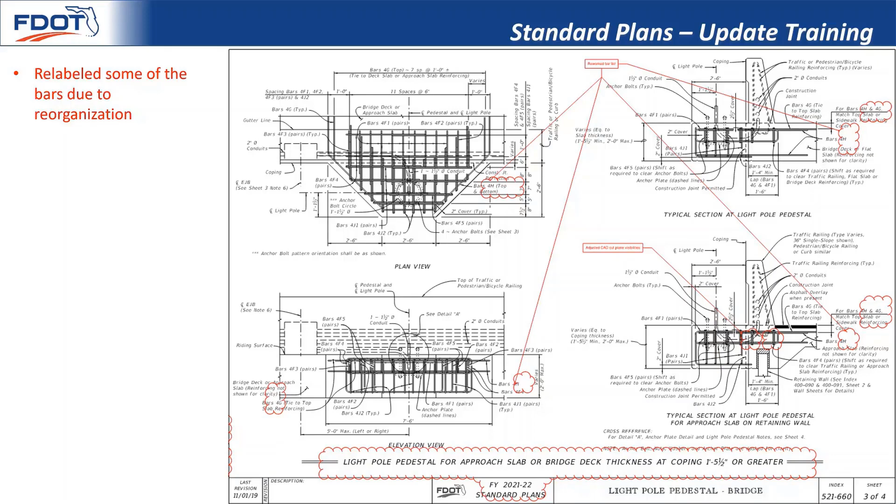On the third sheet, again, we're changing reinforcing labels to make them in line with the new bill of reinforcing steel. Make everything consistent. Here's the final sheet. And on the fourth sheet, we have the updated bill of reinforcing steel. On the bottom right here, we just add a reference for the conduit to index 630-010 for ease of use.

And on the left here, what we've done is we've added an anchor nut to the anchor bolt. And the reason we do this is there's a gap between the pole base and the pedestal. And because of that, the compression doesn't go right to the face of the pedestal, it goes through the anchor bolt. So we provide an anchor nut for the reverse forces of compression through that anchor bolt to prevent anchor breakout. And here's the final sheet.

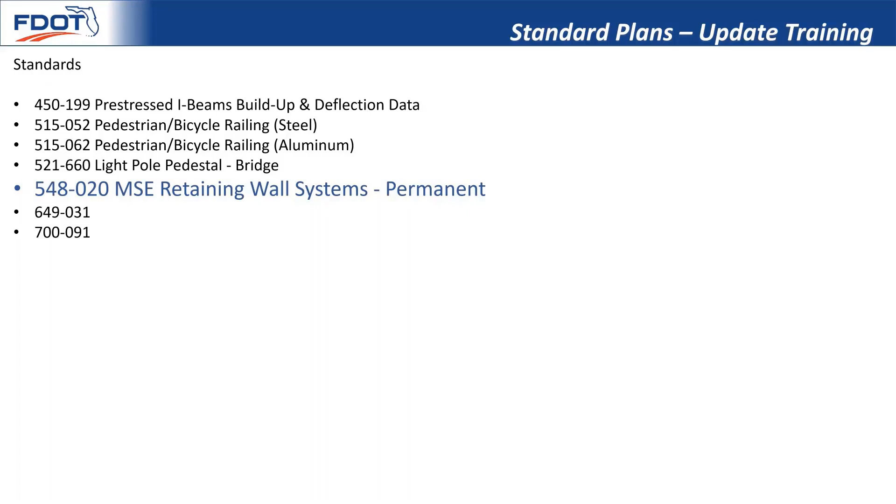Next, we have 548-020 MSE retaining wall systems, permanent. Here what we did is we removed the 2E alternative option from the 2D wall type. And we did this because it was felt that the 2E option may not accommodate the more aggressive environment that the 2D wall type was designated for. And here you have the final sheet.

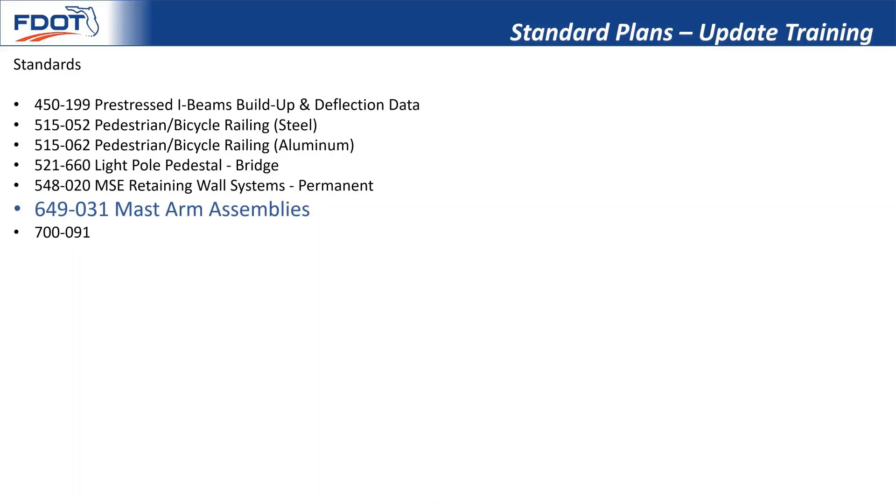649-031 mast arm assemblies. So these changes came about because the fabricators were asking us to put in some of the things that they do that are constantly being picked up in shop drawings and being approved anyway. So we've added some of those things to the standards to facilitate a quicker, faster process without unnecessary repeated approvals.

So on the first sheet here, we've added some language to the materials for the aluminum pole caps and nut covers. And there's the final sheet. On sheet 2, we've added some language about the silicone caulk. And here's the final sheet.

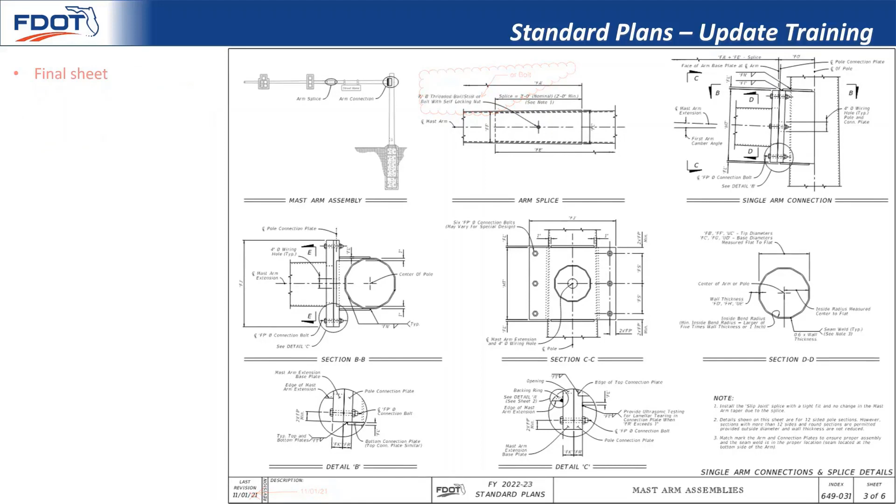For sheet 3, we added an option for a bolt at the arm splice. Now that option goes for both the single arm connections and also the double arm connections. And here's the final sheet for the single arm connection and the one for the double arm connection.

And finally, we added on sheet 6 some notes for the pole cap to allow for both a dome and a flat top. In addition, we added a note about the terminal compartment. So we added an option to be able to have a constant depth terminal compartment. It was rather tricky for that terminal compartment to fit it on the rounded surface of the pole without doing a lot of complicated cuts into the terminal compartment.

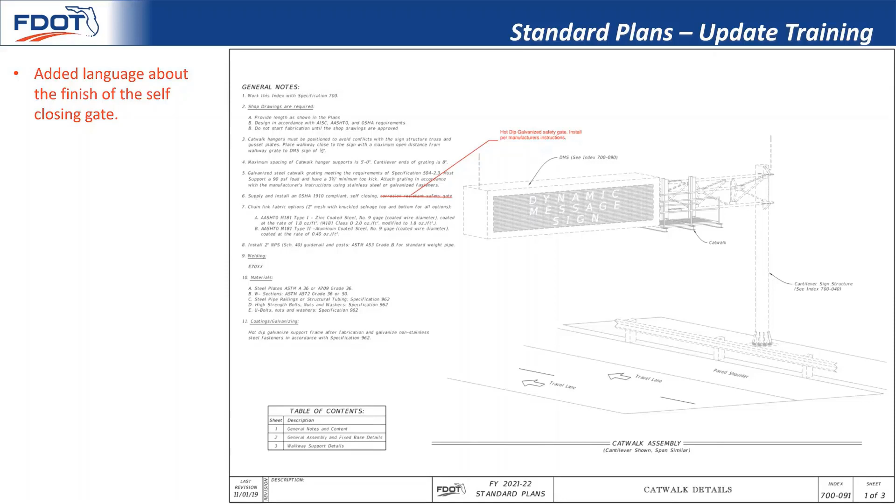So we made a constant depth terminal compartment, and then we would just cut into the pole and weld on at the tops and the bottoms, and the sides would sit flush. So that's an option that's available for the fabricators. Next up is 700-091 catwalk details. Here we just added some language about the finish of the self-closing gate. Here's the final sheet on that one.

So last but not least, we have 700-040 and 700-041, the cantilever sign structure and the span sign structure standard. In the top here, you can see that we corrected the lap splice distance of the closed ties. There's higher strength concrete here, so the lap splice distance required there is less.

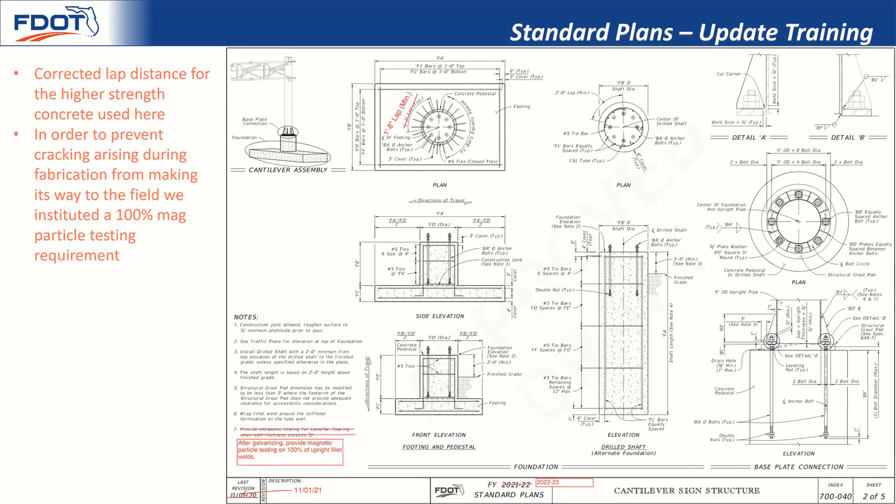Also, in order to prevent cracks which occur during fabrication around the stiffener plate welds from making it to the field, we introduced a 100% mag particle testing requirement for those welds, and you can see that in note 7. Here's the final sheet for 700-040 and the final sheet for 700-041.

All right, that wraps it up for all the notable changes. There's a lot of miscellaneous errata and formatting changes that we did, but we won't spend the time here to go over those.